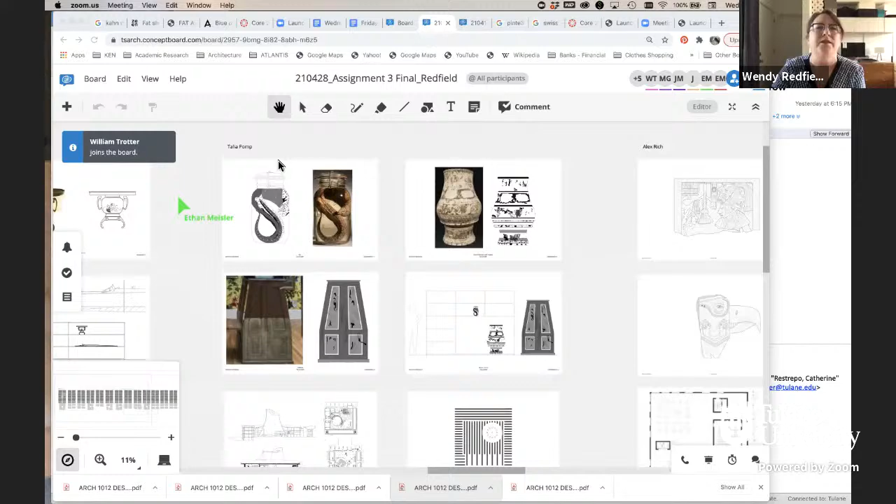All right. So without further ado, students, have I forgotten anything? Should we just get started? Okay. So we're going to start with Talia Pomp's project. And by the way, have you familiarized yourself with the concept board at all?

The drawings are in sort of 2 columns per student. And they start with what we called the 3.1 sub-project, which was the curation of 3 objects to draw in Rhino to start to get familiarized both with the collections and also specific artifacts. And then of course we were saving them as entourage at this phase to place in their final drawings. Then we went into a phase of precedent analysis and diagramming to get a sense of figure and field.

In our studio's case, students had to pick from a list of 2 sets of precedents. One were kind of visionary plans like No Stop City or Hejduk's Diamond Museum. There were a few others that you'll hear about. And then they had to pick from a list of built projects. So we had everything from SANAA's Zollverein School of Management to Palace of the Assembly to, oh, I'm blanking. We had Exeter Library, but I don't think that ever came through in any of the final projects.

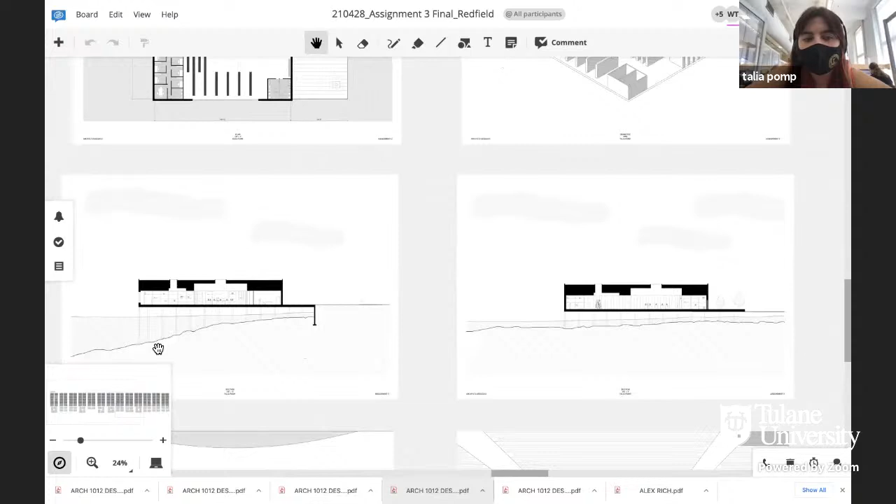And then I drew the perspective drawings of the 3 main galleries, to just show more of the space and how it's experienced by visitors. And then the last one is immersed in the shelves.

The top left perspective is of that large cylindrical one? Circular, yeah. Which was the assembly hall in Chandigarh. And then you have a smaller gallery in the top right, which is this long thin one in the plan, correct? That's the entry gallery, yeah. And then this is a typical view within the shelving, right? Mhm. And then is this your small orthogonal one? Yeah, this is the smallest one. Which is up in this corner, right?

Mhm. Okay. And I know the project was purposefully an internalized project. But can you talk just a little bit about entry? I see the two double doors in the front, what looks like a little desk and chair. But a little bit just about entry and sequence and how people might move through and what your thoughts are with that.

Yeah, so the entry kind of leads into that long gallery, and then you're invited in through these tall shelves, which then open up to more gallery spaces, kind of hidden within the shelves, and then just through and around. And also, since it's an archive space, I was imagining if you were looking for something specific, you would be led to where exactly it would be, or you can go through the galleries and through the shelves into the spaces. Yeah.

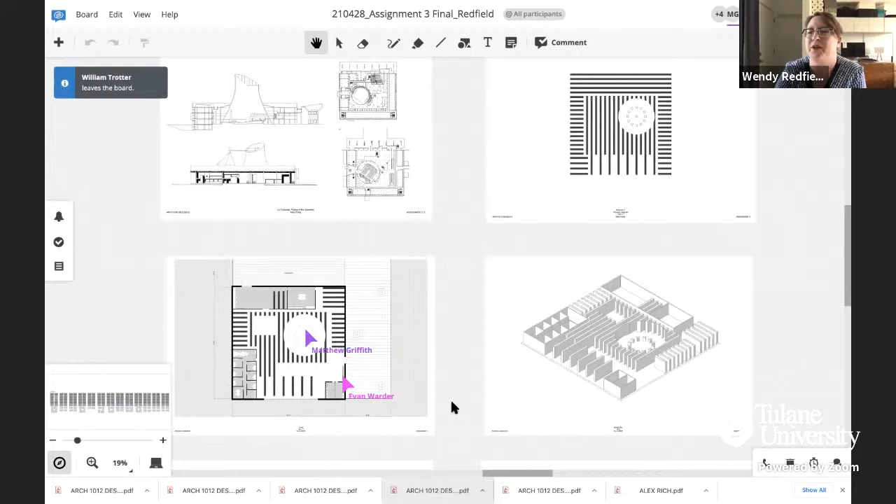What direction is north? Just curious. I'm not sure. I mean, it's more like Riverside. We talk about Riverside, uptown, downtown. But the Mississippi River is fully there. So the traffic of ships and boats runs that way. This is sort of the land side, and this is way down in the Bywater. It's past the Marigny, isn't it, Evan?

Yes, it's in the Bywater, and the north is technically slightly up to the left. Okay. So like that. Yeah, basically. I think that's right. Yep. Cool.

Well, I'll jump in. I think the precedent's a really great precedent project, and I think you understood some things about it. There's this regular frame or module to the building, and then things can happen in a free way inside. That really is common in a lot of Corbusier's mid-career work, where you have a grid of columns in most cases, and then important spaces or objects, whether they be the assembly hall or stairs or offices, get to be these pods of space that are shaped and located in a way that's indifferent to, but always thoughtfully related to the column grid.

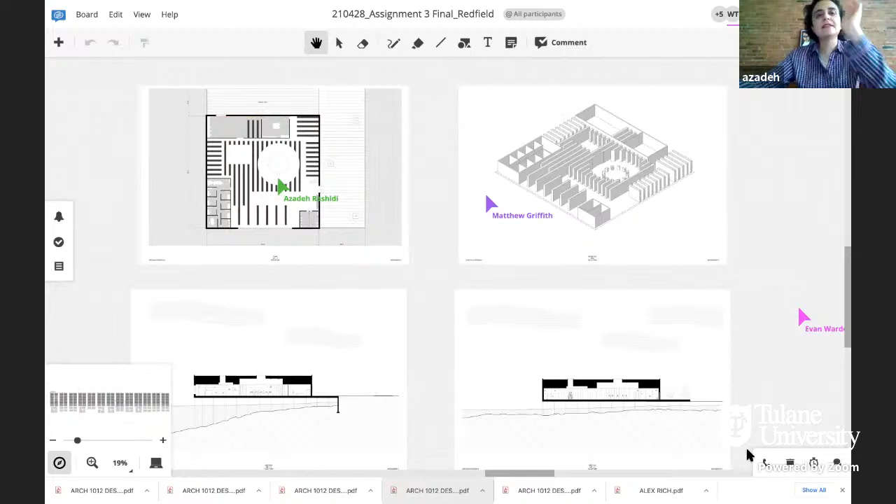Yeah, I agree that it's a really great precedent, and I like what you've built off of it. I think the intensity of the experience of moving through these tight clusters of shelving to discover gallery spaces is really wonderful. I think the organization of what is back of house could be a lot stronger if you really intensified one edge.

The bathrooms right here, I think, is a poor choice, because you could make more of your entrance and the generosity and the open views out by removing this piece and really thinking about the solid service space edge, whether it's this zone here or this zone here, and freeing up some more spaces for galleries as a result, or even just really thinking about the orientation of the shelving and what you discover when you get to the end of a row like this, for example. Does it have to be solid wall, or are you framing actual views out?

And then the other opportunity is to really start playing with this roof form. I think you've stopped at a very flat roof line, but the intensity of this experience and arriving at this space should yield something magnificent once you're there, in terms of the volume of space you inhabit, not just light pouring in, but really exploring how you sculpt that space three-dimensionally.

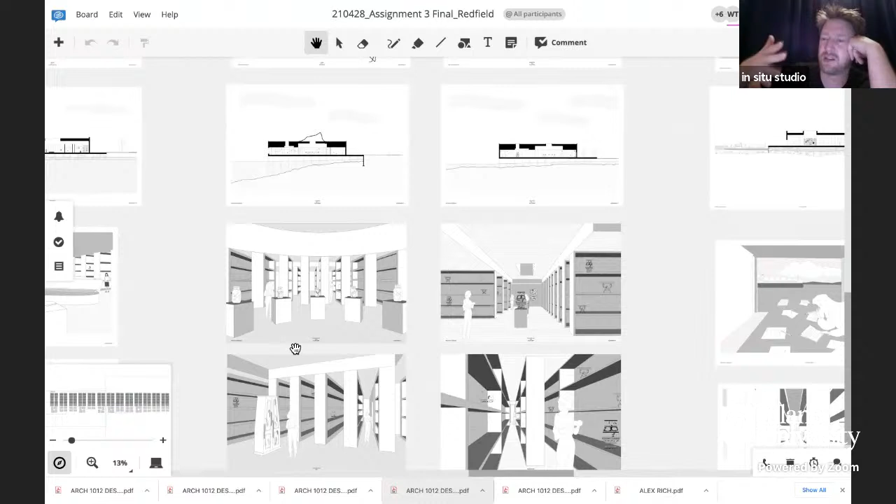I also think it makes total sense that you didn't do this now that I know it's been 3 weeks, but the one thing in your renderings that really stood out to me is that all of the shelving units are the same, and they look like shelves. In a space like this, you would eventually get so intimately familiar with the collection that you would be designing little vitrines and certain lighting conditions and relationships between skylights and little pedestals, to display some of the most significant things in a special way, and use that to guide people through the space. On the way, they would see the myriad other things in the collection displayed in a less important way.

And you could use that to start to create a path or a series of paths or a loop through the space that would draw people in. From the moment they walk in the door, there's a first destination inside that they're drawn to, and you pull them back into that main space that you want them to be in. That would take a lot of thought, more than 3 weeks would have afforded, for sure, but something to be thinking about.

Yeah, all of these comments just made me really excited for future projects, because all of those ideas are really awesome, and learning more about the precedents just made me excited for learning more. So thank you.

Some students did, and Talia was one, kind of broke the rules a little bit and added windows in various locations. She has this big one out facing the Mississippi. But in some ways, I think the use of skylights alone would be more in keeping with the precedent, which doesn't have a lot of exterior breaks. All light comes from above, and it's very dark actually in that courtyard space.

But it seems like the lighting above the galleries that she's included in the sections would also tend to draw you; you would be drawn to the light like moths maybe. Right. Yep. Which are the main gallery spaces.

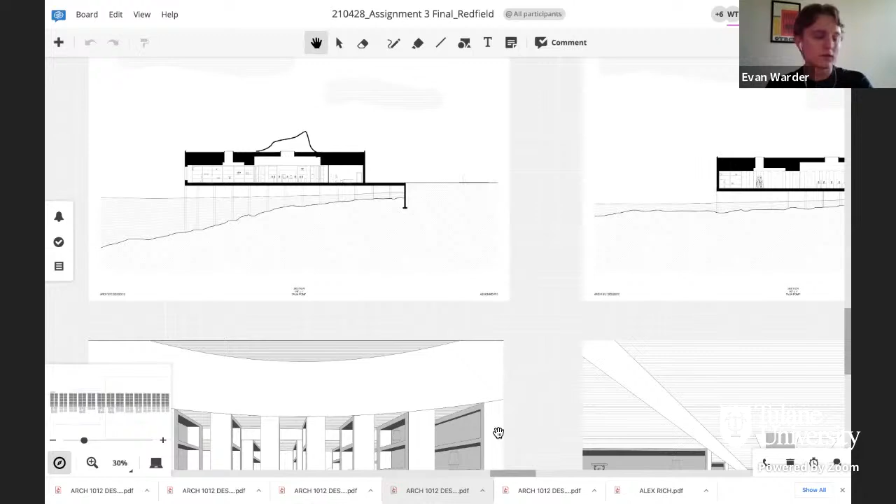Well, if there are no more comments here, we should probably move along. We'll go a little long on these early ones to get through these various issues, but we'll pick up as we go. Thank you, Talia. Great job. Thank you so much. Thank you. All right, Jordan.

Yeah, hi, I'm Jordan. When I first started, in 3.1, I was mainly attracted to a curation of Mardi Gras themed items or artifacts because I'm a native of Louisiana. But after that, the precedent I decided to go with is No Stop City. What I found interesting about it was this aspect of organized density throughout the shelving, interrupted by these organic curves throughout it.

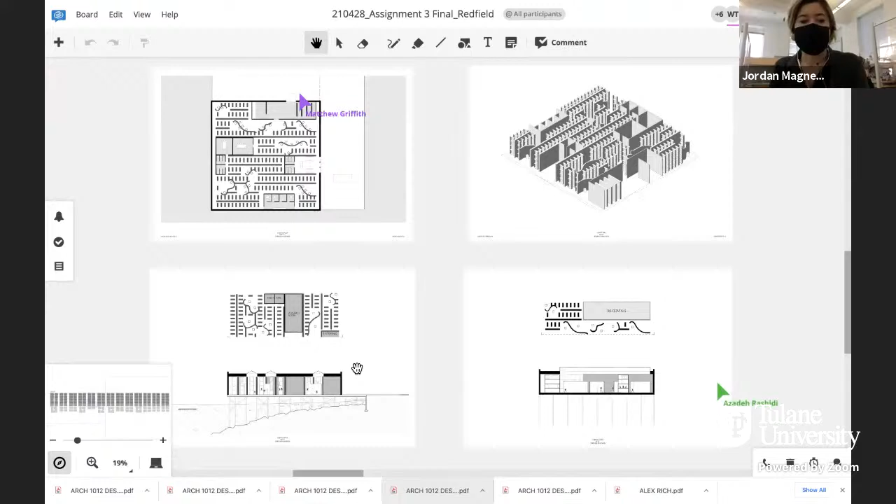And I feel like it really fit my idea of exploration through an archive, where you go on an adventure, wander through these shelves, and discover these little pieces of space scattered throughout, highlighted by different skylights above them. That was a lot of what my process was concerned about, especially different ceiling heights and ceiling levels, so you can still have a sense of connectedness through the archive but still work with this density of the shelves in between.

So the wiggle lines in your plan, what happens at those moments? Those are just walls, and they pretty much highlight the gallery spaces. They're what interrupts the shelving for open space. I'll come down and show some of the perspectives.

So Jordan went the route of many small gallery interruptions rather than one or two big gallery spaces, which I think is arguably in keeping with her precedent. Or certain depictions of her precedent. There are so many different images of No Stop City. The first thing is to choose which one to follow.

Yeah, and honestly, I particularly like the left perspective, because you see the little object at the end of the aisle, which is how I imagine people finding the gallery spaces. You see down this long aisle of shelves and there's this little pop of an object at the end that you want to walk toward.

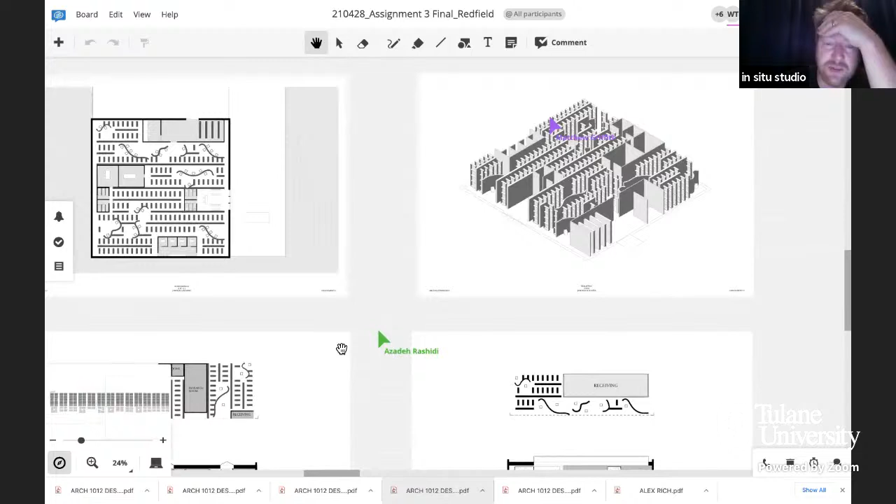In your axon with no roof, it looks like all of the curved intervention walls are the same height as all the other walls. But in your section, it looks like they might be shorter. Is one of those true? Yeah, they actually are shorter, because my shelving is like 18 feet 6 inches and the curved walls are 12. Okay. It may just be a trick of the axon. Actually, they are. I can see a couple that look like they're shorter.

I think what throws me in terms of where you went from the precedent study to this plan development is the addition of these long linear walls. Because that plan really implies the freedom to move in all directions, right? There's a grid that's a structural imposition, but there aren't really impediments in your way as far as the precedent goes. But these long linear walls, I think it's an added system that actually really kind of disrupts the flow through the space and the experience of the space.

And I think you could do entirely without it because you have the structure of the shelving and you have the freeform gallery moments through that. But the whole kind of exploration of space is constantly blocked by these long linear walls. So I'm curious to know where they came from and why you felt it was important to have them.

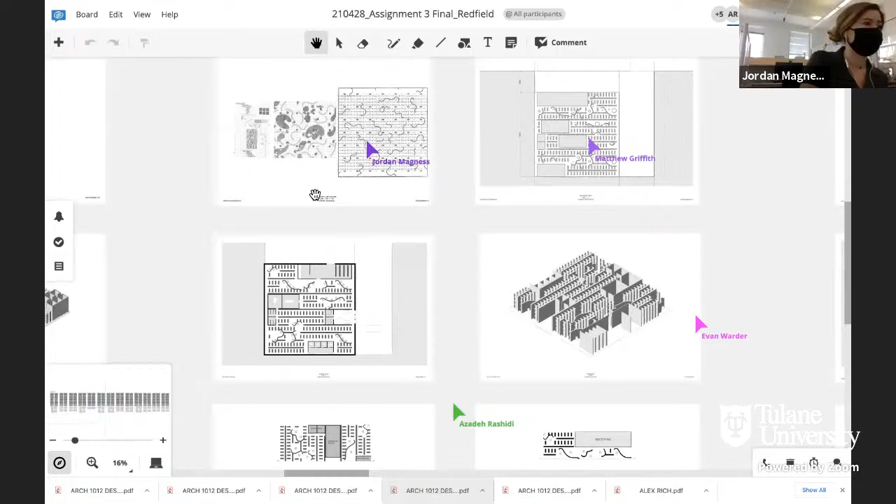Mainly just I thought that they mimicked the piece of the precedent because, I guess in the precedent image above, it has the little pieces in between, but then it has these really long lines of, yeah, of like dotting. And I did try to use the kind of curved walls to break through it so you could still move through it, but they definitely still...

Yeah, I think you could be more aggressive about allowing people to make their way through the plan where these curved interruptions happen by having the curves break through the walls more. But I can imagine this project where the back of house spaces are actually the structure. So it's like a poche that's holding up the roof. And then you don't need these linear walls at all. And it's all about shelves and the moments that are broken up by galleries.

I think as a clarification, the horizontal elements are walls in the space in terms of space definers, but they're also long shelves. And there was a moment where the 9,000 or however many square feet and lineal feet of shelves, it was massive. They were told to maintain about a 70% solid shelf versus open space ratio.

And so there was a moment, especially as the program and the idea of a real plan came along, that all the shelves kind of disappeared. And so I was, again, a little bit of the Nazi of like, we need more shelving. But I completely agree that these horizontal ones probably could have been broken more at different points.

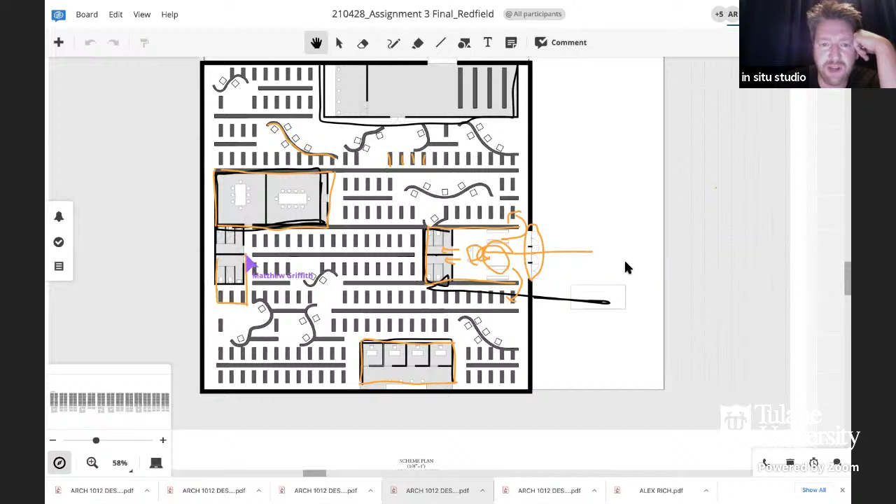And once you get around there, like Oz was saying, and just to build on that, I would make every effort to get all of the supporting program in these really distinct zones. No L-shaped things, just all rectangles floating in there, and then everything else is either a shelf or a curved wall. I think the reason I was asking about the height of the curved walls is going back to this discussion about how light's brought in. When I look at your section, which I'll go to wherever it was, yeah.

This sort of move here, bringing light in that is aligned with or in allegiance with the kind of bays between these straight walls that I think we're all saying might go away. That feels like that's one way to bring light into the space, but I wonder if it wouldn't be more engaging to actually have the curved walls somehow come through the roof plane and catch light and bring light down,

and then actually have the shelves be shorter than the curved walls, so that when you're looking across a whole space, you can see these curved walls going up through, and you can kind of use those as a wayfinder in the space across the kind of sea of shelves to find different nodes or important spaces. And if they were slightly different colors or a different material, they could start to become objects themselves in the space that you're then drawn to.

And then these more important objects that you've set against these curved walls would take on more significance. It might be a smarter way to use those walls, because in the plan, hierarchically, they feel much more important than the grid of shelves. And to have them be shorter and to have light come in over the shelves instead of in relation to those spaces that the curved walls make seems a little backwards to me.

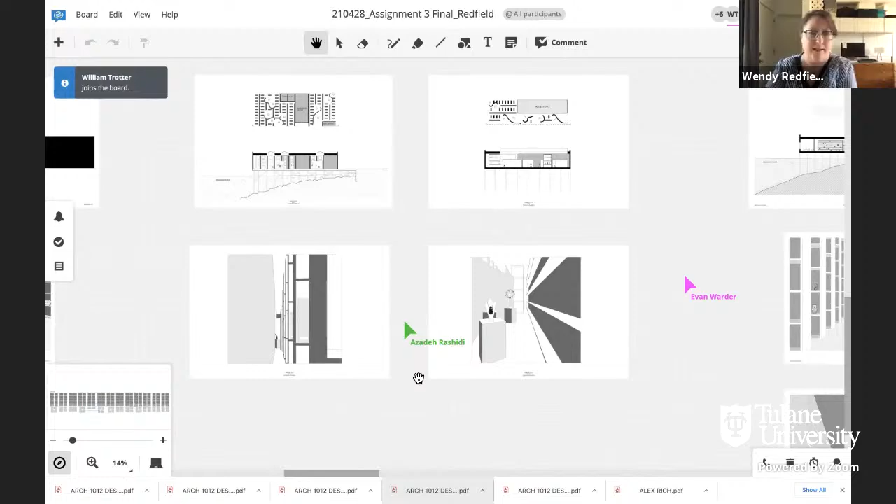By the way, since we're really focused on precedents and they're really building their visual literacy, et cetera, if you have specific precedents, I can go hunting for them and plop them on the concept board. Just as I'm thinking of, I can't remember which Swiss architect, but there's a ski lodge that has a series of these kind of popping up skylights. If you can think of particular examples anywhere along the way, I think that helps the students too.

Well, I think this conversation about the precedents is so interesting, and what hopefully the students will take away from it is, I notice your plan is very, very similar. I can tell how you derived your plan from the precedent almost directly when I look at it. There are certain walls, like this wall is almost in the exact same place in the precedent as it is in your project. Same with this one. Others had to move to accommodate back of house program or whatever.

It makes me wonder if you internalized the lessons and the ideas in the project, or in contrast to that, if you were more interested just in the patterns and the kind of shape of what was there. But with precedent, instead of getting bogged down in the specifics and trying to do exactly what the precedent does in a literal way, I think it's always nice to learn the lessons.

And in this case, there is a really homogeneous field condition with these special moments that kind of interrupt it and cause a disruption in that system. And those things immediately become the most important thing. And so the experience you have in the architecture should probably be elevated in those locations as well. One way to do that would be to bring light in those locations, as we were talking about; there would be other ways to do it as well. But just remember that lesson: when you're looking at a precedent, always ask yourself, well, what's the big idea here?

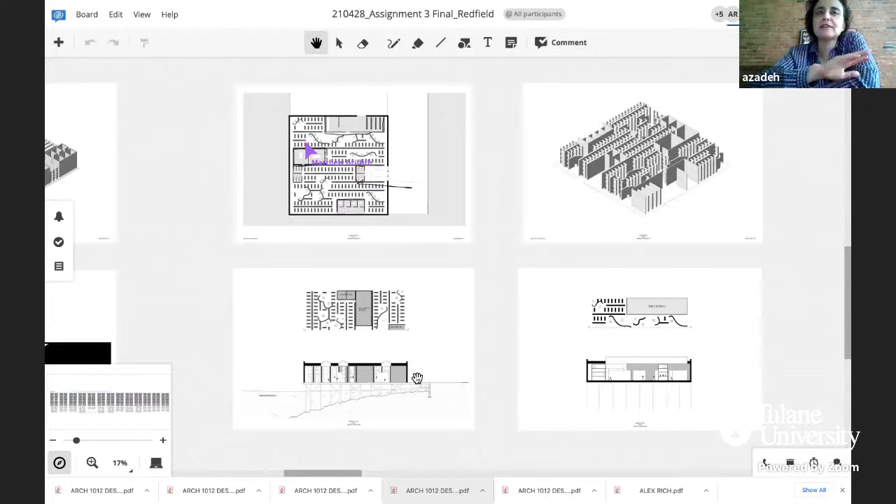So I think it was a surprise, because like I said, last year it was sort of proposed as like this building could be anywhere. There were no windows really even allowed. And even when the students were presented with the site here, it was sort of proposed as well. This thing could be taken off on a barge and moved somewhere else, so like, yeah. So they were given a site, but sort of discouraged from responding to it. We'll just pretend there's no site. It's fine. Better to do it that way.

Although at least they have learned kind of the rudiments of how to draw an entry plaza and sections. I think that's really great support. So it's gotten a lot less abstract than the final drawings last year, which were just black at the bottom, black at the top, and black on the sides and everything that was going on the inside. But at the same time, that raised a lot of complications and opportunities that really were almost impossible to fully deliver on.

So I'm not surprised by the kind of things coming up. And I think it's great to talk about them as sort of projections into what's coming next and the various facets of architecture that we couldn't really get into here, but they will. Yeah. So I don't want to discourage the sophistication of the conversation, but just to contextualize it a little bit. Okay. Right. Did you have something else to say, Matt? Oh, no, I think I'm good.

I just noticed there's an alligator in the section, which seems appropriate to Louisiana. You'll find pelicans and kind of like manatees that have swum north, I guess, from Florida. Yeah. Yep. Creatures going on in various places.

All right. Thank you so much, Jordan. Yeah, thank you, Jordan. Thank you. All right. Next up is Alex. Hello, how y'all doing? Hi, Alex. How are you? I'm good. How are you? Good. Alrighty.

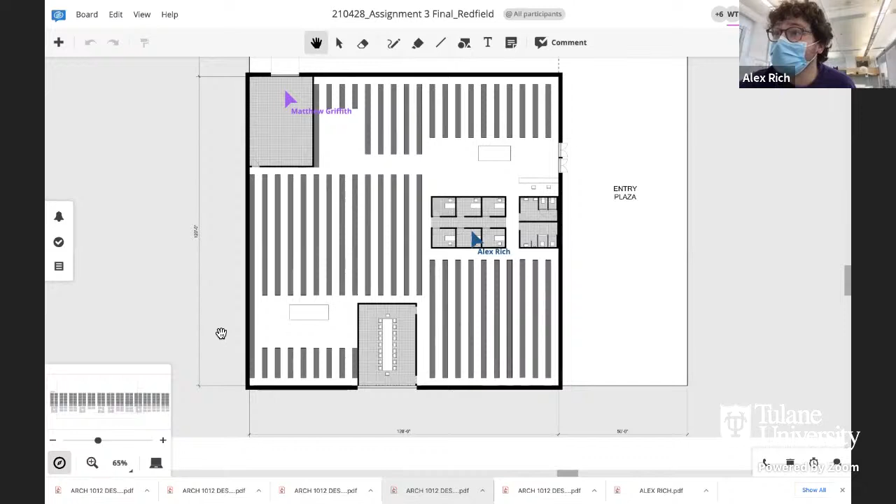And so you see in my plan, all the shelving, you enter in through a large exhibit, and you then walk through a hallway to another smaller exhibit. From there, you would walk through shelving down into a smaller exhibit as well. From there, you could walk around the edges or through. This is the research room right here. It's broken away from the rest of the museum, offices and bathrooms and loading spaces at the top.

And with my perspectives, the first one looks through the research room. The second one looks right at the entrance, the biggest gallery. The third one on the left looks through a hallway, squeezing through shelving. And the fourth one looks at the second biggest exhibit.

And I'm kind of a history buff, so I was really inspired by MARI, which is the Middle American Research Institute. So there is a theme throughout my whole entire exhibit, specifically ancient Latin American artifacts. So, yeah.

Can you tell us just a little more about the precedent? Because I'm less familiar with it. What was it called again? SANAA's Zollverein School of Management and Design. Okay.

I think your approach is very clear, and the organization of space is good. I think one thing your precedent has, which you would benefit from, is just kind of the celebratory sort of corner space. I wonder if, I know you have shelving quotas to meet, but it seems that experientially at some point you want to reach a space that really kind of opens up to the outside.

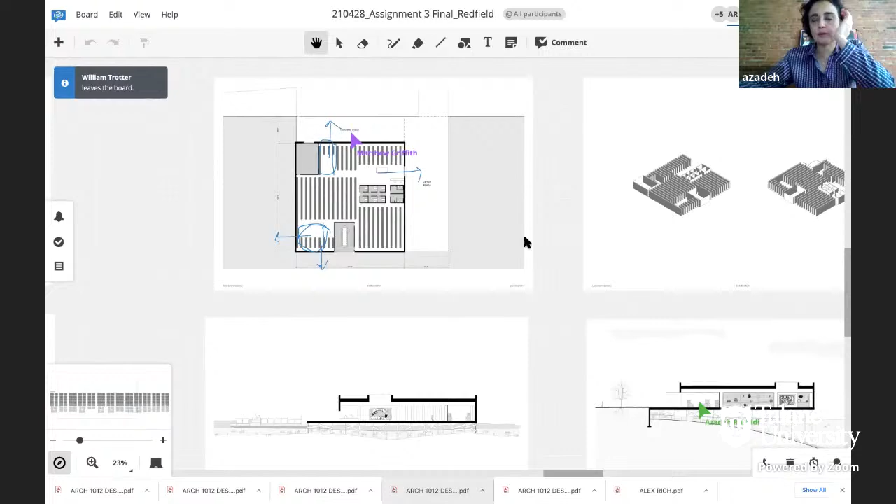That then becomes something that can help further the section as well, which you're well on the way to doing in terms of the skylights and moments of punctuation. But as these moments engage the corners of the building, I think it starts to inform what can happen with a facade potentially. I know I'm not supposed to talk about that, but it's to like stifle the conversation.

Take ownership. Every time you say the word facade, we're going to hit a buzzer. We can't help it. We're architects. No. I mean, it's all fair as long as you know what they had to work with, and that's all.

Yeah. I think that's a really interesting comment, Alex, because you've kind of given that priority of great space and view to the meeting room. So it's understandable that that was almost the first perspective you did. And yet that's sort of restricted to just certain individuals who use the space. But the idea that that large picture window out over the Mississippi for the researchers could have actually continued to encompass and characterize at least one edge of that gallery, if not the full corner. That's a really interesting idea.

So Alex was one of the first to break the window rule, in other words, he really wanted. Good for you. Given that he had it in hand and knew what to do and put it in the right place, I was like all for it. And so I think that, yeah, again, with another week and a half, even, that kind of idea would have been a great addition.

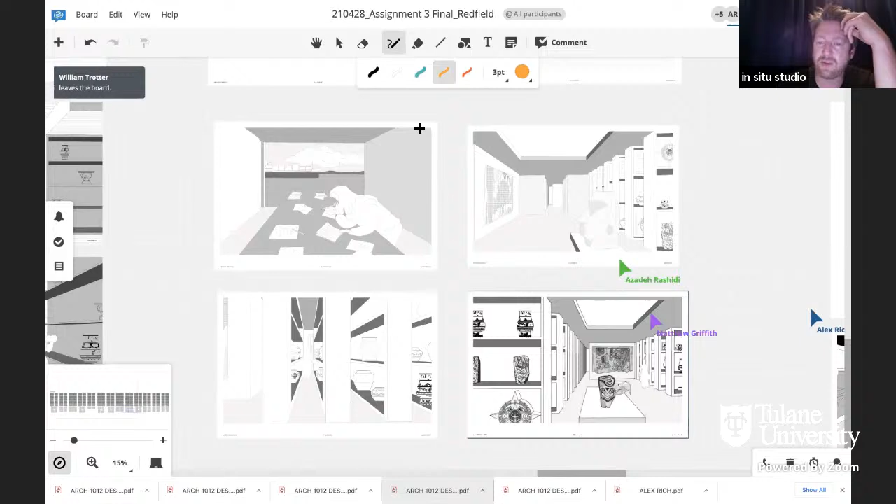And you've associated natural light with those spaces that are given to those more important objects, which I think all those instincts are right on. That lower right perspective, by the way, is a great example of how not to make roof openings, where you can just read the unnatural thinness of the roof plane. There's no curb around it or no contour to a light well or something like that.

And I know you didn't have a lot of time, but I hope all you guys will continue to investigate different ways of controlling and directing light into a space, sometimes indirectly. I think that space would be really beautiful with a more hushed type of light that's from a more mysterious source, and where you really can't see the sky.

I lied. I am actually familiar with the precedent. I just didn't recognize it from what, on my screen at least, is a blurry plan right now. It's a really cool project.

The one thing that's so different about it than what you've done, and I don't know that it's your fault, I think it's more in the nature of the program you're working with, is the majority of the space is open on that main level plan in that precedent, and there are discrete objects that house certain programs, three kind of back of house support pieces, and then the auditorium. And because there's so much open space, those really feel like objects in the space.

And anything else in the space, like display or shelving or seating or whatever, is much lower than the ceiling height. And because of the nature of how many shelves you're required to have, your space is in many ways the opposite, where in a figure ground it would primarily be dark space, not open space. And you're carving out these little open spaces. So I hope you're aware of that significant difference.

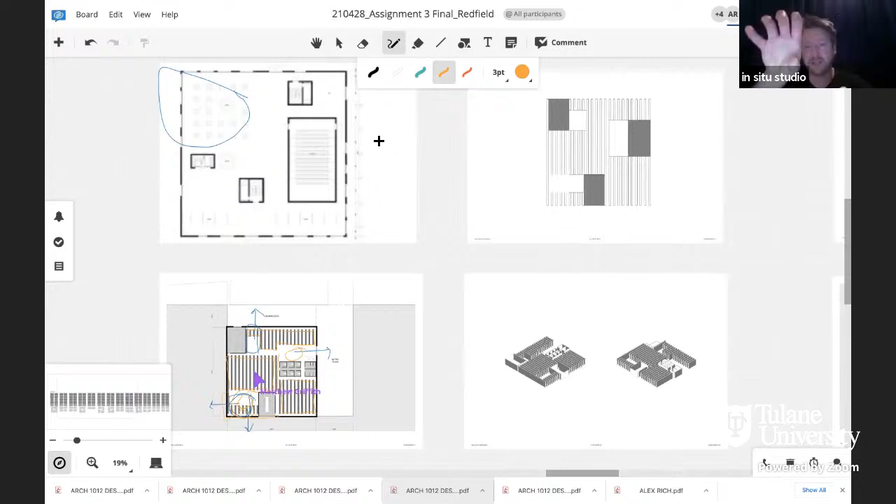When you start thinking about these things as blocks, they can start to kind of pinwheel or slip and create these moments where you can kind of slide in between two when they overlap each other, and then find your way out diagonally. And so there's moments like this, where two pure rectangles just kind of slip from each other, is how you can start to connect one negative space to another. But I think in general you got a lot of it right.

And again, those perspectives, of the ones we've seen today, they're pretty convincing that you're really thinking about this well. And I think one way you're starting to get at the precedent more in terms of this open plan is by defining a larger volume than what the shelves define spatially, right? And I think you could push that a lot further by really lifting that roof up so that the first thing that's perceived is the overall shell of the building. You feel that entire space. And then these shelves are really kind of secondary divisions within space.

So I think your instincts are kind of there because you're holding the shelves down a certain dimension. But is anything restricting the volume of building you're making? Nothing, right? So imagine if your roof was suddenly 20 feet higher than what you've drawn. Then you really have that kind of overall form, and you're exploring within it, and these shelves become a secondary kind of structure of space.

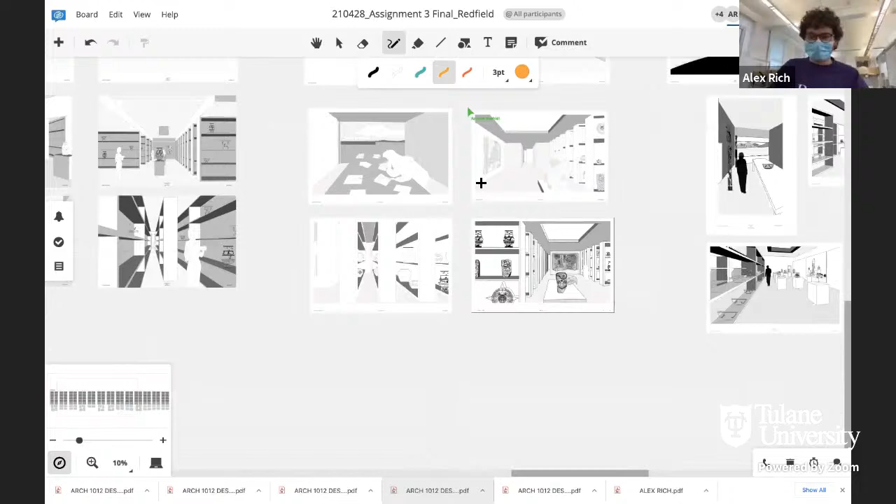Have a good one. Yeah, you too. Chester is next. Are you with us, Chester? Hello. Hey, how are you? Doing well. So here.

My precedent was the Kunsthaus Bregenz by Peter Zumthor, and it's a museum itself, so that lent itself to a really good exploration of the building and was really helpful. Some of the ideas that I wanted to explore were the ceiling and how it's basically these muted panels of light, and they cover the entire ceiling throughout the structure, and then how the walls were these very simple and refined solid forms that sat towards the side of the building.

So moving to my diagram, I wanted to incorporate the walls in a way that was very direct, because one of the things I appreciated was how efficient the building itself was. It really was minimalist in nature, and so that's something I've carried into the diagram. And I came up with this rule set to orient the shelves, so I had them repeat into the center gallery space.

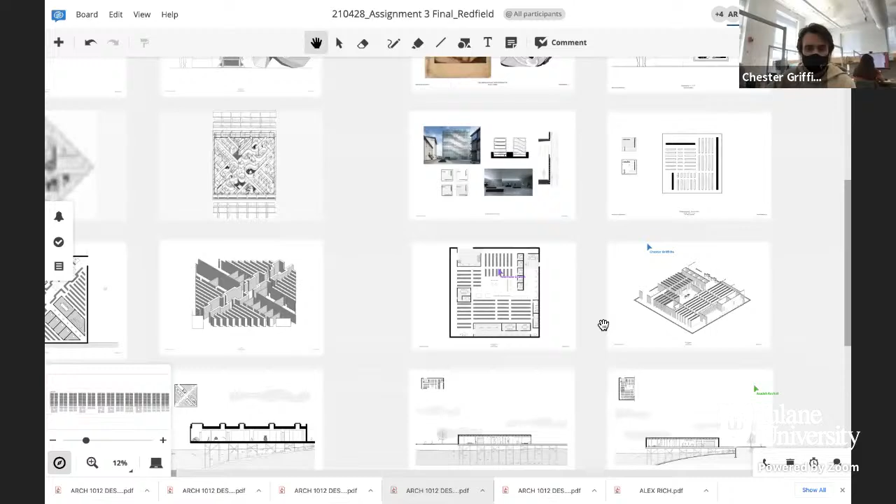And the entry is also an idea that you're led towards the gallery space, getting an introduction into what you're going to see in the middle of the space, just as a preview. Additionally, I wanted to make sure that the sections and perspectives gave an insight into how you would experience the space walking through it as you would a gallery. That's why I chose to incorporate the hanging gallery walls with the ceiling, so you get an idea of how it would look as a real space.

Is the ceiling everywhere, and is it artificially lit, or are there openings, holes in the roof somewhere? Yeah, so they're offset from each other about 2 inches. And then there's a lighting fixture within that, and it's like a muted panel, very similar to what happens in the Kunsthaus Bregenz. So it's offset, but it does have artificial lighting there.

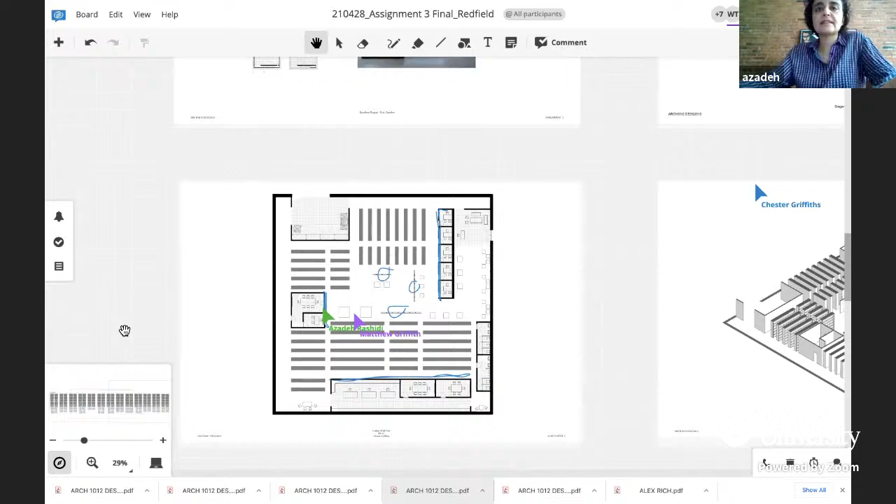So in terms of the organization of the plan, it's worth considering whether these doors should really happen on this. This is a gallery, I suppose. But think about the side you really want to privilege and use, because these are going to be different than your shelves, and they're important surfaces to explore further.

I really like moments like this, where you slip through a tight corridor and discover an amazing space. And when you draw a plan, you should be very wary of corners like this, because that's a bad dead end condition where nothing happens. So think about entering a space like this and really using every bit of floor plate you have to your best advantage. I thought we'd caught all those dead end corridors. They have a way of sneaking back in here and there.

Yeah, that's a great suggestion, Oz, for sure. If we have any more final comments.

I think the blue surfaces that Oz just traced are the key thing, and they aren't necessarily located exactly there. I would argue that the program behind or within those walls needs to be as attenuated as it possibly can be, so that those chunks of program can be those walls. And I couldn't agree more that the screens feel completely superfluous. You really want to create an open space between this pinwheeling of program walls. The challenge then becomes how to get all the shelving in there without it becoming a distraction. But that's the challenge of the project.

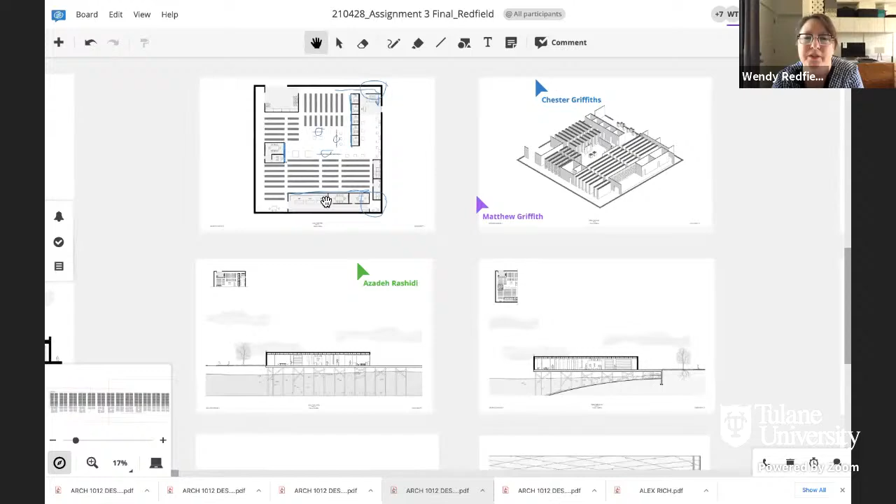These are really great precedents to work off of. Yeah, they're the gifts to keep giving, I think. I've tried to winnow it down to the ones that work well. And I think, to your credit, Chester, you really did study this building. I do feel like you understood it not just from the standpoint of one of the plans, but of the whole material palette of the building, and you really tried mightily to introduce some of the atmospheric qualities of the spaces and not just the plan diagram. So I would say good job with that.

And don't leave the Kunsthaus behind. It will serve you well on many future occasions. Oh, go ahead. I was just going to say that some of those blue areas that were just talked about, looking at that differently now, I think it opens up even more aspects of the precedent. After a second time around, you look at that and you go, okay, well, there's a whole different slew of possibilities you can go from just those suggestions. So that kind of makes me want to revisit this and see what other path the precedent can take. That's what final reviews are all about.

Yeah, I hope you noticed that around the edge of the building, the light coming through the ceiling is natural light. I think you probably know that. So if you have these moments of natural light coming in, maybe you don't remove the ceiling. Maybe the ceiling keeps moving under a light monitor, so there's just a portion of the ceiling that glows much more brightly than other areas. And that could be a really beautiful thing, especially if you could read that whole ceilingscape when you walk in. It'd be really amazing.

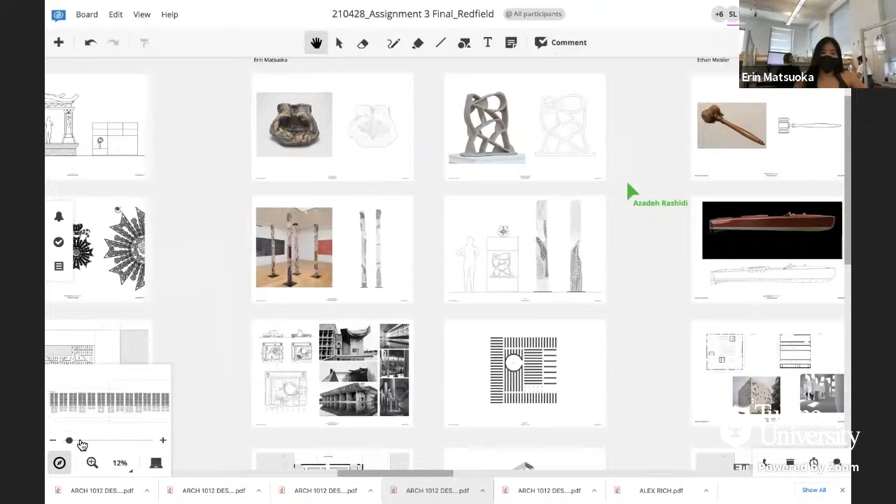Anyway, okay, great work. Thank you, Chester. We're going to move to Erin's project next, which is just down the road. Hi, I'm Erin. Starting off with the artifacts, I chose sculptures that are all some sort of abstraction. And then my precedent is the Palace of the Assembly by Le Corbusier. From that, the main elements I was focusing on were the main margin that runs along the three sides, the spacing of the walls that support the large curve on the outside, and then the offset circle space in the middle.

In translating that into my plan, I used that margin to pretty much dictate where my back of house space is. I also reoriented it so that the curve would be where the entry plaza is, and I lowered those shelves down to let in more light along the entryway. Then with the dense column grid, I wanted to mimic the columnar grid feeling in the actual precedent, where they're almost touching the ceiling and you get disoriented when you're in the middle of those shelves. Then carving out the main sections, the entry exhibit spaces, and down the hallway into the offset circle, which I use as my main gallery, and then back out into the shelves. So yeah.

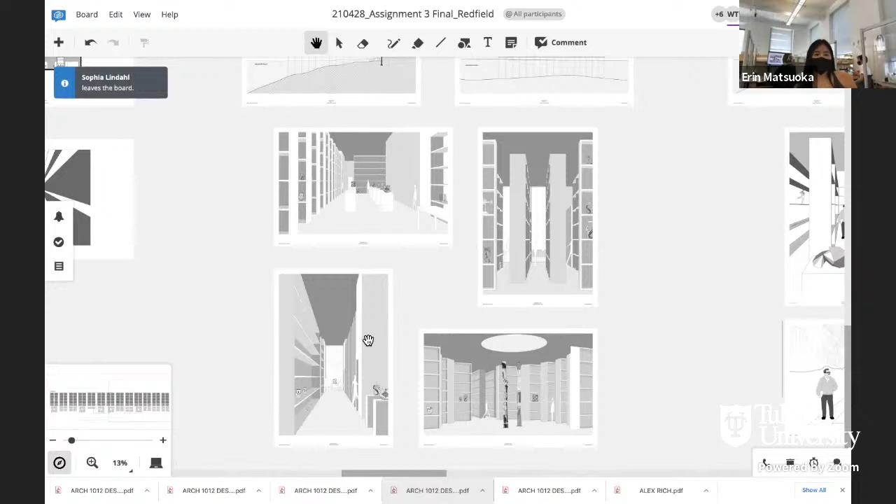How do the abstract artwork and sculptural forms inform your project? Well, I guess with the form of the precedent plan, I used that abstracted diagram as the direct layout and circulation. And then going back to the artifacts, exaggerating the painted trees as a main gallery exhibit piece, and I exaggerate those so that they're similar to the columns. And then having smaller pieces throughout the spaces, mostly in the entryway, where you see those pedestals that lead you back.

Well, I like the organization of your project a lot. I like the clarity of, you know, this band of back of house and leaving the larger space for exhibition and shelving. And I like the play between the spacing of the shelving and the height of shelving as a way to kind of influence the experience and think about things like natural light and so forth.

I do find the central gesture to be too dainty. I assume again these things are kind of being driven by the requirement for amount of shelving, but this gesture I think could be a much larger thing that encompasses much more underneath it, right? Like you can arrive at a space that connects to that skylight, but your overall roof form and volume of space that you're creating can be much bigger in relation to this plan.

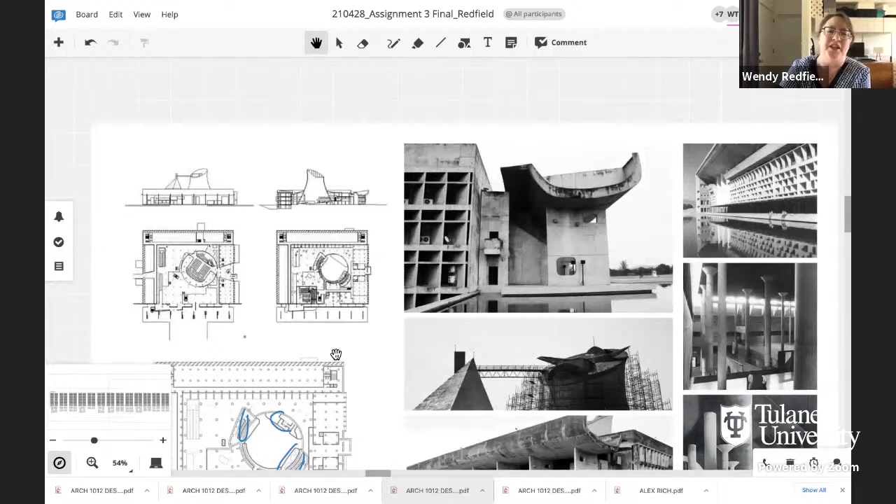Every reviewer in every review always says something that I'm just kicking myself. Why didn't I think of that? And that's bingo. That's one for sure. I mean, what a brilliant idea, because you know, it would be a reversal of what Corb did, right? So the space at the bottom is huge. You know, it really dominates that courtyard space. But then, you know, it kind of narrows to the top.

So if you understood it the way that I did, Aaron, what Oz was saying was that the small gallery in plan at the bottom, which is necessitated by needing so many shelves, you can't have a huge cylindrical space. But the idea that the kind of dome or circular skylight above it could be much bigger and even offset from, you know, not just centrally located. Brilliant. I love it.

We talked a lot about the necessity with this project of the cylinder being off center. I feel like that was a really intentional, even ideological statement by Corb that, you know, this is no longer an absolutist government. So he pushes that central space off center. So we talked a lot about that in plan, but the idea that you highlight that notion of it being off center by having the dome maybe centered is even more powerful.

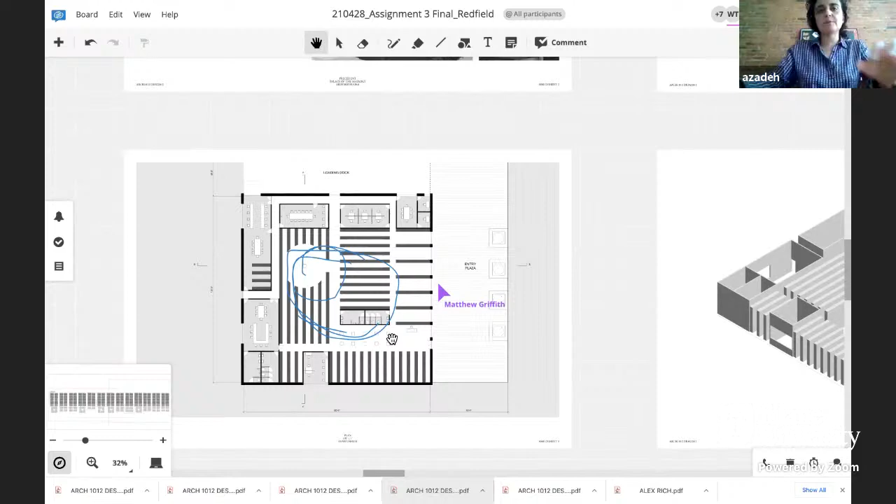It's really cool. And then it's interesting to look at the way Corb still has service spaces be part of that overall form. So when you look at your bathrooms, for example, it can start to hint at the overall form above by not being something rectilinear, but something that sort of defines the edge of this gesture, right? That's really neat.

I'm drawn to the different spacing of the shelves in the front area here. And I noticed that you violated the no windows rule. And it kind of makes me wish that the front wall of your project was here, and that somehow you were entering under a roof in between these fins before you ever entered. And the idea that you use this spacing to create a more open condition at the entry than you have in the more congested parts of the interior, I think is really nice.

I think another thing you've done really well is in at least one really clear case, when you're moving through kind of a route of circulation, you're able to see out. It's one of your nicer perspectives. I would encourage you to think about the same thing here, or maybe there's a hall in between these two program pieces, and this window is able to kind of be at the end of the hall. This idea that you're in these tight spaces, and sometimes you find these beautiful round gallery spaces, but when you cross over one of these routes that's meant for movement across the whole plan, you can kind of see outside.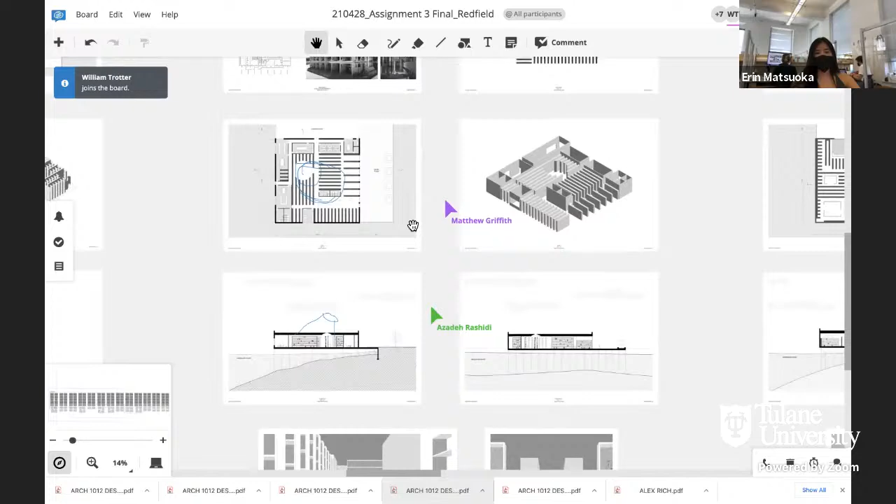I talked to Wendy about this, and we kind of just ran out of time, but building out onto that entry plaza and blending the entry with the outside a bit more is also something that I would have liked to expand on. So I appreciate these comments. They're very helpful, very in line with what I was hoping to go with. Nice work. Very nice work, thank you, Erin.

Okay, unless anybody's desperate, we'll do two more projects before the break, or one more. How are y'all feeling? Fine. Great. I have to make sure I have enough power. Hold on. Yeah, I should last. I have to go get a charger at the break. Okay. Well, let's do at least one more, and then we'll check in with you, Matt. I think I'm good. I'm at 41%. I'll keep you updated. Okay.

The next project is Jessica's. Hi. How are you? I'm good. Okay, I guess I'll start. My precedent was OMA's Parc de la Villette. We spent a lot of time doing our plan diagrams and eventually incorporating our different rooms.

I designed my entry space to be an open area with seating that almost forces you to visit the gallery space, displaying my artifacts. One of the things that I really emphasized in my plan was the opportunity for mobility. I wanted there to be paths stretching from the front to back of house spaces in every direction, with an accompanying door on as many sides as I could. I really just wanted it to make my plan more accessible.

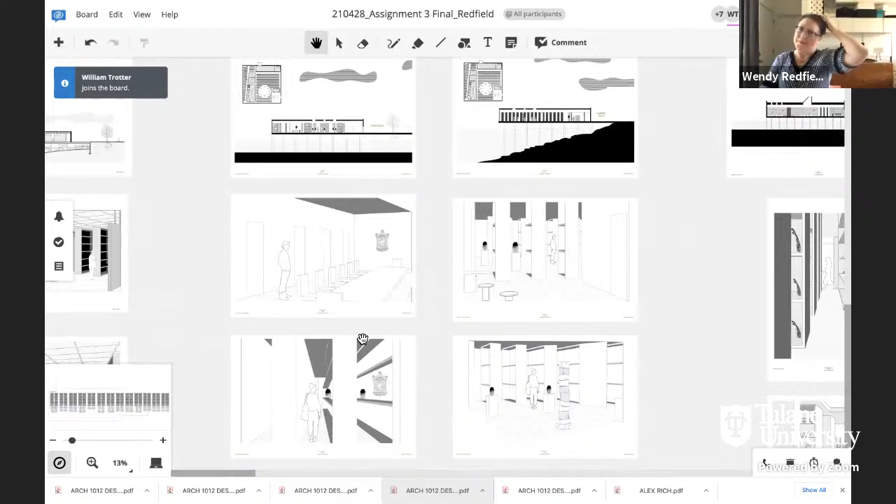That Parc de la Villette plan is just insane. Yeah. So much fun. Do you find yourself wishing he'd won the competition? I do. Oh, definitely. Did they come in second place or something like that? I don't know, but I think a lot of people feel that the best scheme didn't necessarily win. I hear people talking about the OMA scheme as much as the Tschumi one. Yep. The catalog of second place winners over the years is some pretty strong work. Yeah, the B-side, right?

Jessica, I guess in my mind, what are some of the key things you took from the precedent that you tried to do in terms of how you organized the plan? Okay. Well, definitely the elevator speech. Yes. Well, I definitely took that main path that was actually like a road, and I made that a walkway. And another thing that I took from the precedent was the big rectangular space,

and that's kind of central to the precedent. And instead of keeping that rectangular space, I kind of flipped it and made it shelving and put all of the back of house around it, right around where the rectangular space would be. So the space between the gallery and the back of house. And I also created my gallery kind of based on some of the visual features of the precedent.

There were a lot of circular elements below the rectangular area, and that's kind of how I got my inspiration for that. And I replicated that in the entry as well, that circular. You have to zoom in a lot if you want to see it. You can actually see it in the final layer too, but there are these two circular elements below the rectangular space.

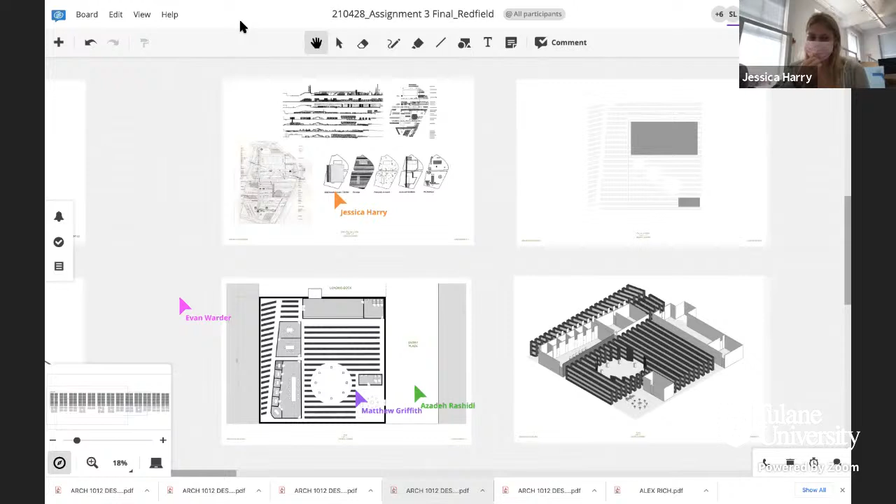It's funny that you say that, but also say that your project was about accessibility. Yeah. You're trying to do two contradictory things, which could be interesting, but the plan doesn't really distinguish between what makes this a different experience and path versus this, right? Everything's the same scale in terms of what circulation is. Mm-hmm. And I think you could push and pull on this a little more so that there's greater definition of what path is through the project and what that intention is.

Yeah, I think the thing that has been so important about OMA's work over the last 50 years is the way that different layers of thinking are transposed over each other, and your precedent's definitely an example of that. Typically there's an idea about structure or construction that is one vein of thinking. There's typically a really clear idea about program and the arrangement of program, and sometimes surprising or unusual adjacencies of program.

And then, as Oz already mentioned, there's the layer of circulation and how you move through the project. And a lot of their work, especially their early work, is really clear in being able to recognize distinctly those three things. And so I think a lot of what we've been talking about so far would build upon that. And to me, your project is very close to being organized programmatically in a very simple way. If you think of this as an object here, this is an object, and this is kind of programmatic thinking.

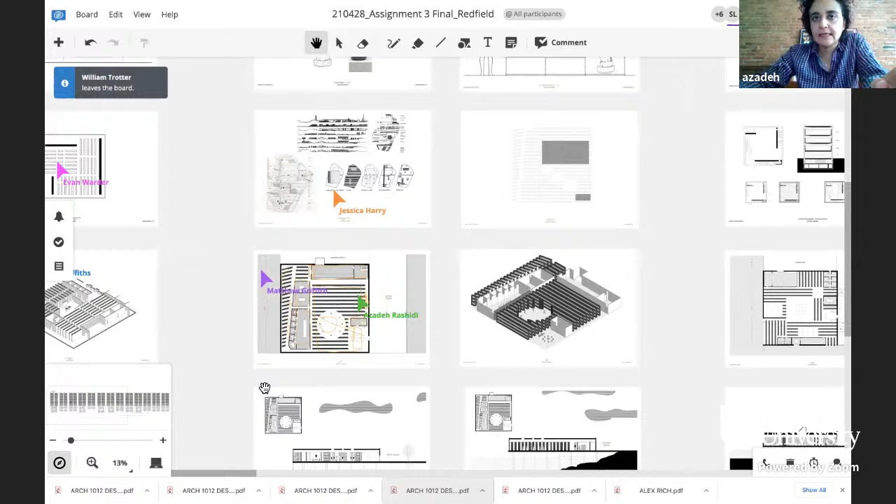So I wonder if you could introduce breaks in these shelves so that people can wind their way around. It's much like their follies, but it's moments where if you're walking along here, you can suddenly take a shortcut and do this and do this and make your way to here. So breaking up the rigidity of this suddenly creates all those other paths and works to your idea of accessibility, right? Because right now, if I'm stuck in any of these rows, I have no way out and I will feel imprisoned. But suddenly, if you start to break these shelves up at random almost, it becomes a much more interesting experience.

I think those are great comments. Do you have any questions, Jessica? Not particularly. I mean, what you guys said made a lot of sense, especially the part about breaking up the rigidity of the plan. If I did have more time to do this, I would probably cut through, create a path through the middle, make it more accessible.

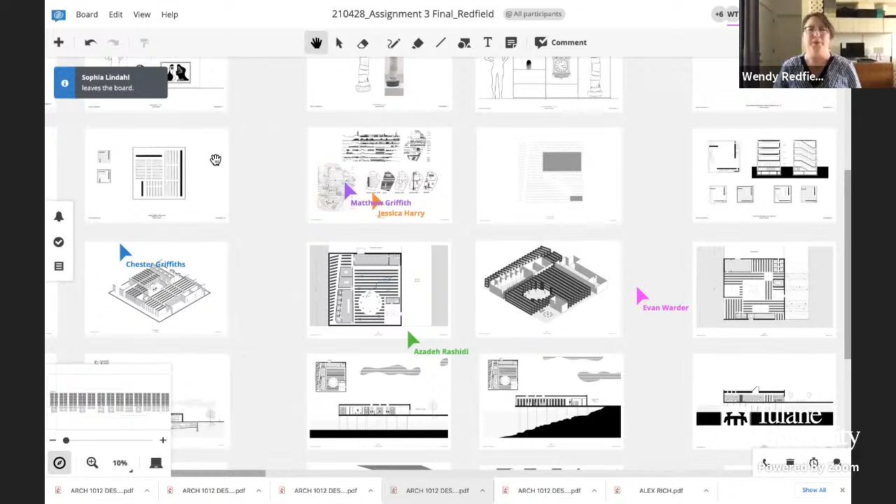Yeah, it's a tough one. Obviously your precedent is operating at such a different scale. It's a little bit like the No-Stop City. You're trying to organize a building with the same spatial strategies of circulation organization that are happening at a much larger scale. And then on top of it, you've got all this very solid program to juggle. So it is a challenge.

I really like the suggestions though about, now that you've established this very rigid and clear diagram, how to make these alternative meandering paths by cutting very selectively, not huge swaths, but selective openings in the shelves. I think that is great.

I also really like Matt's idea of almost having this back of house space over here, wherever that would occur, impacting the division of these two chunks of back of house space, so that you might have, I'm drawing in white, that's not the best. So that the division between the two back of house spaces would have started to pick up and reflect on that. Is that what you were talking about, Matt?

Yeah. Well, and that same diagonal, ooh, you're drawing in Zoom now. That's fun. Yeah. That diagonal also would clip just the edge of this important space. So you're not brought through the middle of it, you're brought right along the edge of it.

And just with that simple move, you create this one kind of circulation route that has all these surprising engagements of the special things in the project with one simple move. It might even, not accidentally, clip the corner of this thing, so it really kind of touches everything as it goes through. And the only way into these program spaces would be from these walls, and otherwise they would look completely mute around the perimeter of the rest of it.

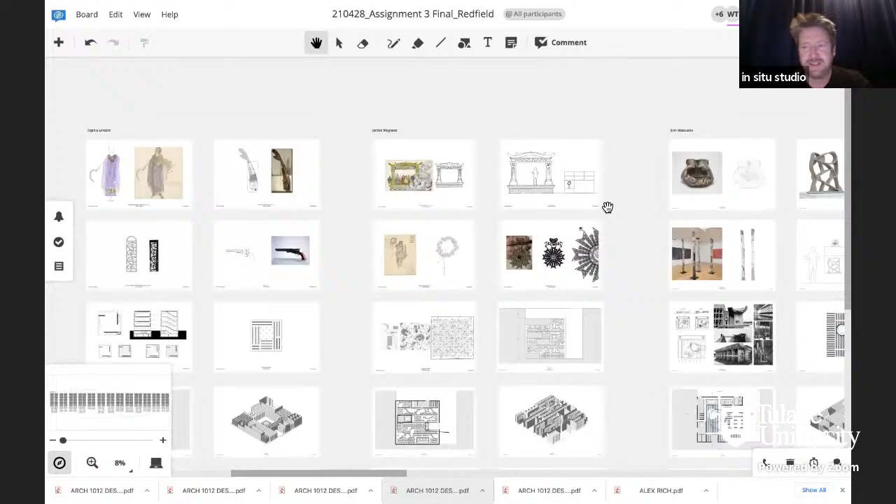Does that make sense to you, Jessica? Yes, thank you so much. Very good. All right, how you doing there, Matt? Oh man, I think I'm doing great. All right, we're gonna do one more and then we'll take a break. So the next project is Ethan's, and he's going to tell you about it. Yeah.

So we all started with artifacts. I took a look at the list of artifacts that Tulane has, found some that I liked, and went with a wood theme a little bit besides the cast iron vase. I've really liked boats, I've grown up around boats, and antique boats were always a cool thing. So when I got the chance to draw one, I got pretty excited. That's the main piece of my exhibit.

For my precedents, I had the SANAA, or the Zollverein School of Design and Management, and then the Diamond Museum. I really like both of them. They both introduce free-flowing plans. One's a lot more orthogonal, one has a lot more to do with curves and spaces. They both have enclosed spaces that are still open. So I tried to stick with that. My SANAA ended up being stronger, so that's the one I went with.

You can see I have almost like pockets of gallery spaces, or rooms, back of house too, just dispersed throughout the plan. Some of them were gallery spaces, some were back of house spaces. And over the gallery spaces there would be skylights. You can see it in one of the sections and a couple of the perspectives, to highlight what I want people to be looking at for the most part.

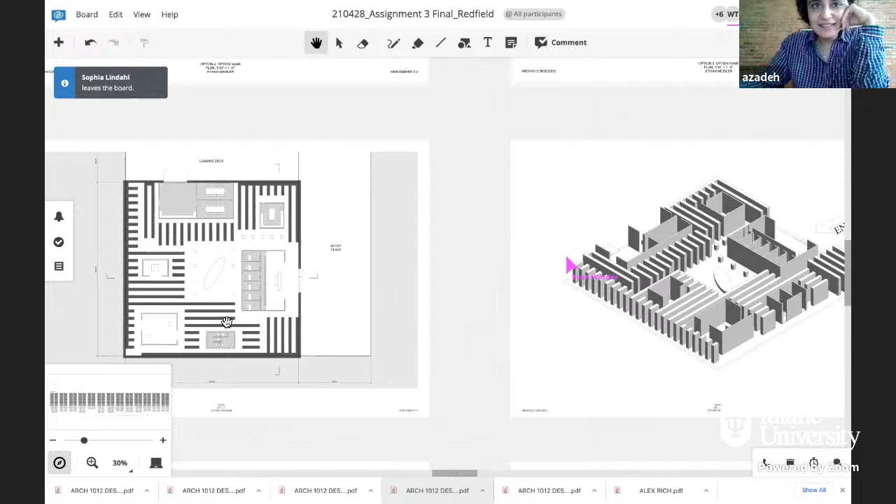This guy really looks like a boating enthusiast. Yeah, we were joking with him that it was starting to look a little bit like a boat show, but don't put ladies in bikinis in your rendering. Is that a 70s thing? Do they even know what I'm talking about? Do they have boat shows and car shows anymore? I'm sure they do. Yep, they do.

Hey, Ethan, just a few questions about the plan. What's this space? That would be a gallery space, kind of a mid-sized gallery space. There's a smaller one, and then the open space in the middle would be the largest, and then the boat space. Cool. And what's this space here? That's kind of a multi-purpose room. It could be a meeting room, research room, storage. There were a number of back of house spaces we had to include. I made it a research room, but all I put there is a table and a counter, so it really can be multi-purpose.

And it looks like in your renderings you show some openings in the roof. Where do those occur? You can see them in the sections. There's three of them. The sections only show two, but they would be right above the two enclosed gallery spaces, and then above the boat. Okay. Oh, I see. You can see all three of them in that one rendering. Right. Edge of one, and then the others.

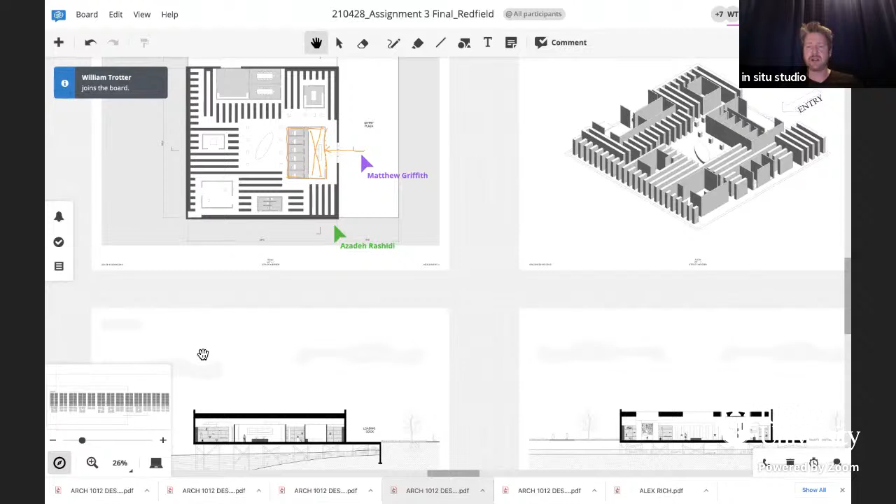Then moving around it and having the main central space be right behind that, I think is also nice, because you have to kind of move around to either side of it, forcing you to be aware of the object nature of that piece at the entry. And in general, the way the program's organized, I think is fairly strong.

You should draw lines above, like dashed lines, to help us understand where openings occur. So, how big is the opening over the boat? Is it that big? Is it more of the shape of the boat? I mean, there's so many options there. So it's a little hard to read those things.

If I look at the spacing and figure ground of the objects, the galleries and the back of house stuff that you've put in, I think they're well arranged in relation to each other, and the central space seems scaled nicely. What doesn't seem as clear to me is the orientation of the shelving and the location of it, and why sometimes it stops here or here. Here we seem to start having a space, but the orientation of the shelves around the space doesn't seem to really reinforce the space-like nature of that little zone.

That stuff seems much more chaotic to me, and I think your precedent project, the SANAA one that you said you ended up favoring, is much more clear about the different, if you want to call them, field conditions. I use the word field because a field is any area of similar quality, basically. It's much more clear about those zones, and I feel like your shelf network is kind of chaotic.

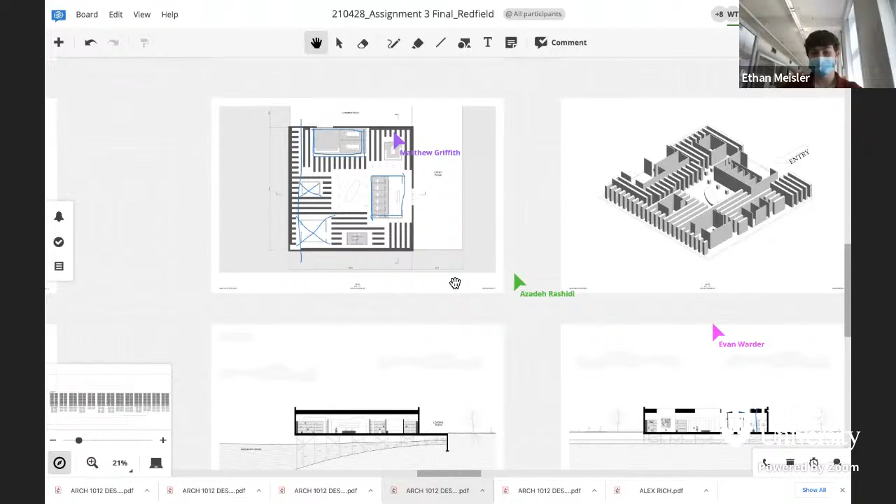Yeah. Well, I can understand how, in trying to essentially replace what I was taught to call the MAZ, or milling around zone, that really dominates the Sanaa project, with shelves. In other words, making the solid void. A decision would have to be made about the orientation of the shelves. Space doesn't have an orientation, but shelves do.

And I think the thinking was, for some schemes like No Stop City and others, there was a clear grain to the precedent running in one direction or the other. But with this, that was definitely not the case. So I definitely understand why you shifted the orientation of the shelves, but I also can understand the comments that make it seem like we don't understand why they're changing orientation when they do exactly.

It almost makes me want to go back and see what would have happened if, since it's such a strong square grid, even though they defy center in terms of space, you just start with blocks of shelves that run in one direction, then the other direction, almost in a herringbone pattern, and then just start carving out from there. So there would always be this point in the history of the diagram where you could harken back to why they are that orientation in this part of the scheme.

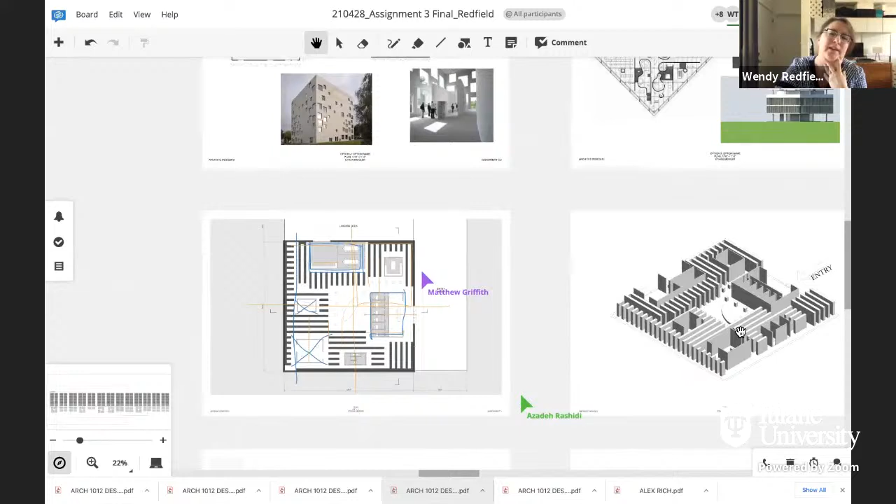To me, this is one that really did internalize, not imitate, your precedent. I think so. In that sense, I think you really did understand the categories of space that it has and translated that into our program pretty well.

Hey, Wendy, this just made me wonder, was the design of the shelf given to students? More or less, yes. I think they even got a Rhino template, didn't they, Evan? Yeah, early on, the spacing was predetermined, 2 foot wide shelves with 3 feet spacing. Because a project like this is very democratic in terms of orientation, like neither X nor Y seems more important, which is very much like all Sanaa's work.

You could imagine just a field of 2 foot by 2 foot glass towers where the objects are on shelves inside those towers. And then neither orientation is more important. But if they were given to you as having to be linear in their orientation, then that precludes that. Yeah, there was a lineal square footage and a surface area square footage requirement, both, right, for the shelving. I guess if it had just been lineal, they could have just made these tall towers of shelving, but area was designated too. Yeah. Then you get to count all 4 sides as lineal. That would be against the rules, but.

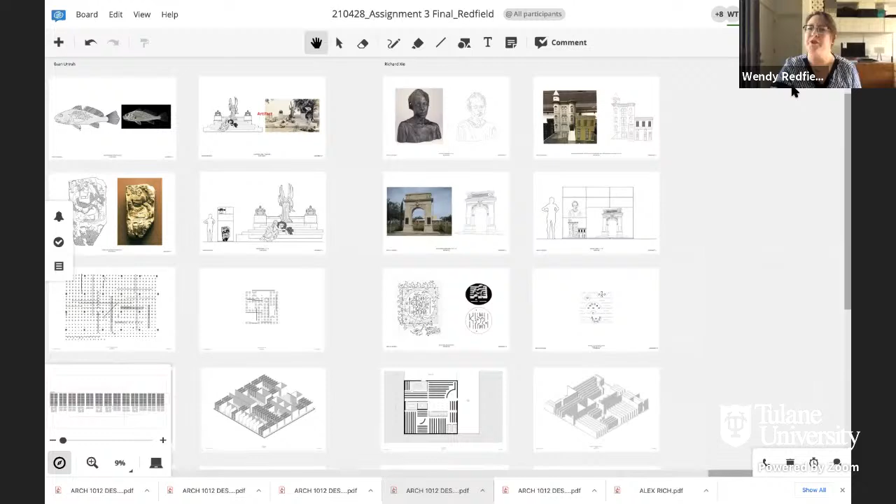Richard, are you with us? Hi, Richard. Yeah, can you hear me? I can hear you just fine. Yeah. Let's make sure all our reviewers are back, but I wanted to make sure you were ready. Oh, okay. I think, let's see. Hey, Oz, I see you're back. Hello. I see Matt's stage, but not Matt. Richard is our one fully remote student beaming in from China at like 3 a.m. So you don't want to have him go first? Yeah, well, I considered it, but it didn't work out that way.

All right. So Richard, why don't you tell us about what you're doing here? You can talk about whatever you want, however you want to introduce this. Oh, yeah. Hi, my name is Richard, and I'll start with the artifacts that I chose from assignment 3.1. So these three artifacts are not super related to each other, but I see them as a chance for me to learn more about the city of New Orleans throughout this course. So yeah, these are the three artifacts that I chose.

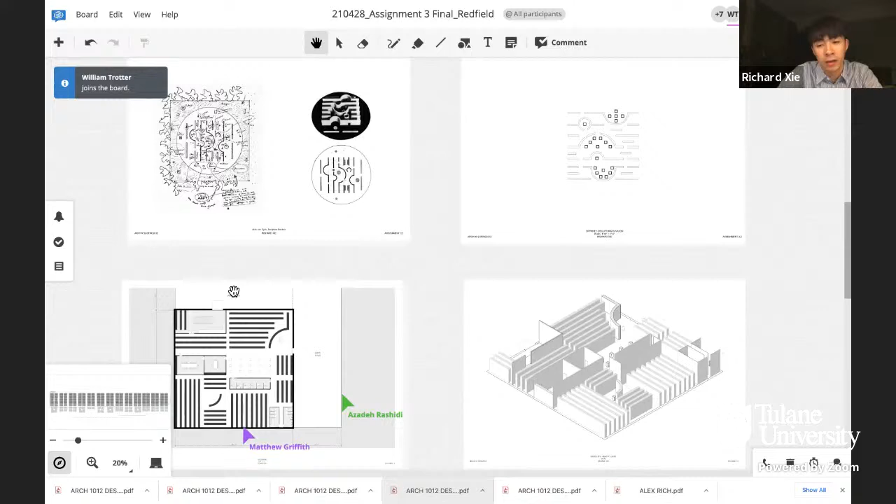So the one on the top right, the curve serves as the front desk. So when the person enters my depot, he or she will see the curve, the front desk, first, and then the other curve serves as a gallery area for maybe one of the important artifacts. Yeah, and I think that's it.

So I'm struck by something in the precedent and your diagrams that I wish had carried through in the project. And that's really how curves play off of each other to create space. It's something that reads very clearly in this diagram. And then your study where, when two curves come together, a space like this is made, or when two curves are back to back, a space is made.

I think as you got into the project, you lost the strength of what these curves can do for you. It's become just small fragments that don't really inform the gathering places you're making within the plan. And I think that's a bit of a shame. It's a missed opportunity. There's nothing that's making this space really special. I wonder why the curve is not the thing that defines this space when it's such a clear organizing principle of both your precedent and the diagrams you've done. Now they're almost like afterthoughts in this plan.

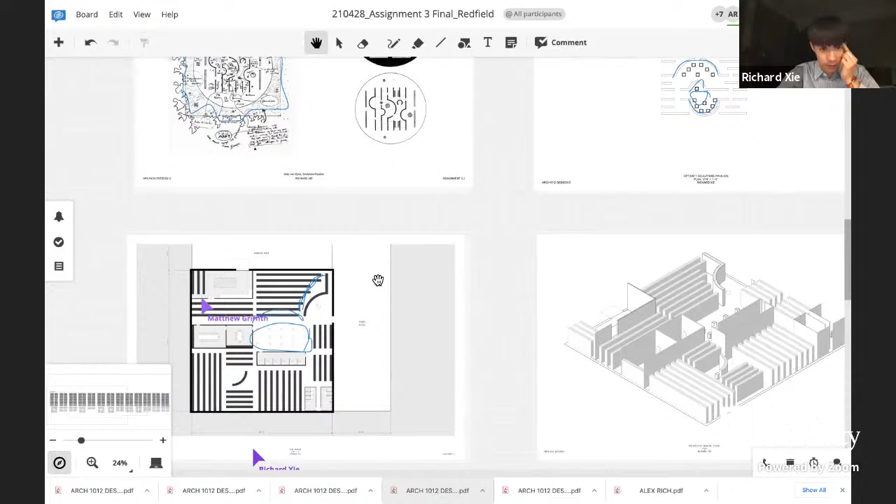Sorry, I was muted. One other thing I notice about the precedent is that the grain or direction of the straight walls is all in the same direction. I really would have picked up on that. I think there would be the potential, if this is the overall form of the project, to have all of the back of house stuff grouped together in one big rectangle along that north edge.

And then all of your shelving is just this super clean move like this. And it's the interruptions in this that start to create spaces, or at the wall, where one of these things happens, it creates the entry. And I know you were given a shelf to work with, but it doesn't seem like a big leap to start curving the shelves. It seems like you've already done it here in your plan, right? Where this reads like a continuous shelf with a curve on the end.

This is one of those rare cases where I would encourage you to more literally study the precedent and look at the way, as Oz already said, the curves are used to make space, because when you say the curves are the most important thing in your project and you're left with just these two little curves that highlight one artifact and the front desk, which itself doesn't curve, it feels like you've definitely lost your way on what you're trying to do.

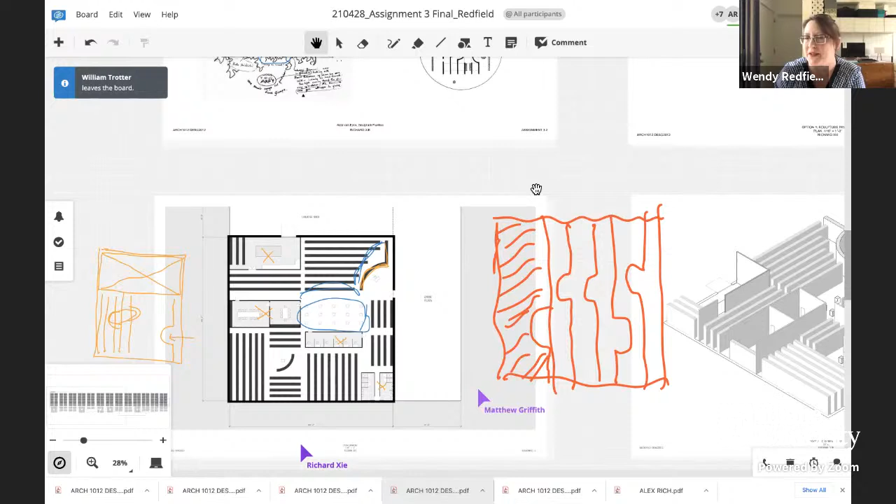Back of house. Yeah, that's right. You move through a kind of almost threshold, sort of solid zone. Yep. Yeah, that could be cool to move through the solid zone into that. I could see it on this side. I could see it where you've drawn it. I mean, lots of options. And you can also make spaces on this wall where two of these things kind of part like this, and you end up making a space that has a view. I mean, there's kind of an infinite number of ways you could use this simple device. Yeah. Once you've made it.

And the other thing that exists in the Aldo van Eyck plan is, I don't know if you noticed, there's even in one place a circle that doesn't quite close on itself. Oh, shoot. I just drew it, but then you moved. I'm sorry. Oh, no, it's good. This little guy right here, right? He's like a little anomaly. So once you make a big space, maybe you start to introduce other little weird things in there that are also shelves, right? So it's not just the line with a little skip stop in it, or whatever you want to call that. Once you've made those spaces, you have ways to create other objects in there.

I just want to point out in the series of translations where that loss of the curve came from, as you can see in that diagram form on the top right, where it was literal. And so we were encouraging adding more shelves, and in doing so, we were saying to keep the curves, but the curves clearly got lost along the way. So it's something that, as you guys are making a great point, can easily be reintroduced. Yeah, neither the precedent nor the diagram has enough density of the storage areas. So when Richard introduced this diagram, we were trying to suggest ways that he could double up or triple up the density, but still follow the diagrammatic clarity that he had, because that was clearly very faithful to the Aldo van Eyck precedent.

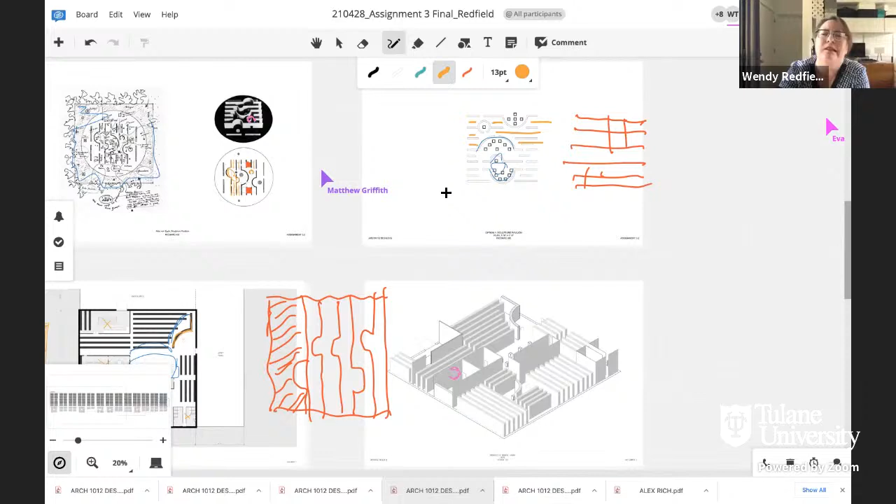I think the main thing that is so clear to all of us, Richard, and probably by now to you too, is that with this precedent, you can change the number of curves, you can put them in different places, you can make them bigger or smaller, but the one thing that just can't go away is the element of your diagramming of it that has a one-dimensional grain. There's no cross grain with this thing other than with the shelving, or the curving of the wall, but that's not even, you don't have any linear elements running this way.

And so that's where there's a really big disconnect in a way from this diagram to this plan. And I think, with more time, we could have gotten that back under control. I know Richard lost a chunk of time in the critical last couple of weeks, and he did incredible work to kind of catch up and complete the project. There was a lot of back and forth and massaging and development of the diagram to the plan that just kind of didn't happen as a result. So

I think with that said, it's really creditable to you, Richard, how much work you've done in such a short amount of time. I mean, 3 weeks isn't enough for anybody anyway, and you really only had a week and a half. So it's amazing to me what you were able to pull off in that shortened amount of time.

Yeah. And Wendy, one thing I'm realizing that's really a lot better about what you drew than what I drew is when the grain of walls is parallel to the service zone, you can start carving those half circles out of the service chunk. That's really nice. Yeah, you might even do it on the other side, so there's like a private little lounge or whatever that faces the water for the employees. It's not open to the public.

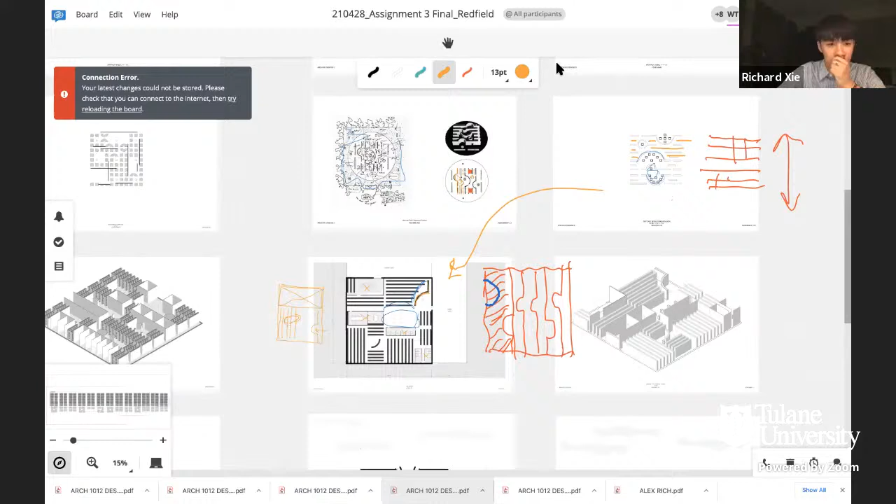Do you understand what the criticism is about, Richard? Do you have any? Yeah, definitely. I think it's my responsibility to really think about how to arrange these curves. Even with the requirement of number of shelving, there are still ways to interpret these curves. So yeah, I really take responsibility for that. Okay. All right. Well, great work still. Really some beautiful graphics, beautiful drawings. Good work. You made it.

All right. So I'm actually going to refresh my concept board because it doesn't seem to be there. But Evan, are you ready as soon as we get this back? I am. We all laid awake last night, well, I did, and prayed that concept board wouldn't crash on us. It's been kind of a little finicky lately. But so far, so good. Should I start? Yes, please.

So, hi, I'm Evan. My design for my archive was influenced by an illustration from Archizoom's No-Stop City. The main takeaways from the No Stop City precedent were the underlying grid system and then the interruptions in that grid that were produced with repeated geometries that were also put in elongated forms. When developing my drawings, I kept these elements in mind. I used shelving as my underlying grid system. The back of house spaces and front of house spaces were implemented in such a way that they conform to the grid system, but could still be recognized as interruptions.

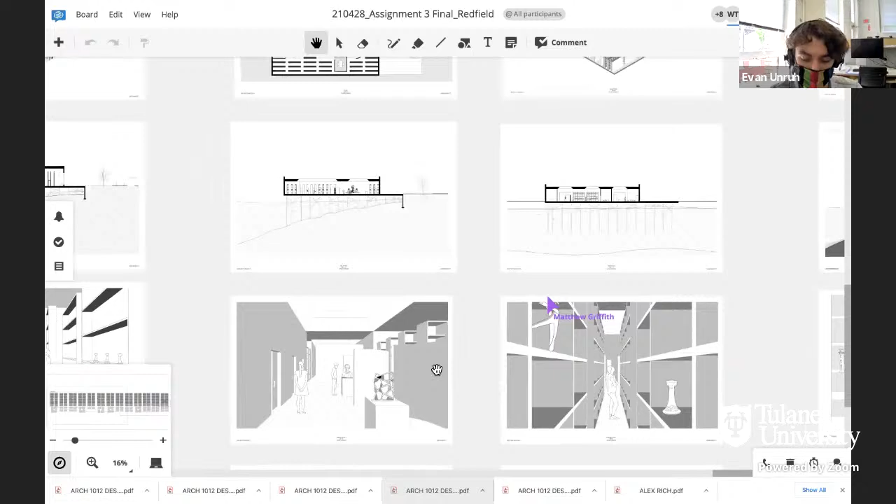Sorry. Moving archive goers through the space was done subtly. The only form of natural light comes in the form of sunroofs, which are only above the 6 exhibit spaces. This highlights and entices exploration through the space because of the light, and the spread out placement of back and front of house spaces entices viewers to look around corners and go through the archive as they see fit, since the shelving and exhibit spaces are otherwise obstructed.

What are the curved elements doing? They are 8-foot high walls that would have the artifacts, taller artifacts hidden inside the curve, and just promote movement throughout the space. So they're kind of protective enclosures for the artifact? Right, exactly. Rooms within rooms.

I think the one thing when I look at your renderings that really stands out about them is, one thing you should always look for in your work is in plan, those curved walls appear to be the most significant things because they're formed differently than everything else, and they are in the middle of or on the edges of the openings in your plan or the larger spaces in your plan. So they seem really important.

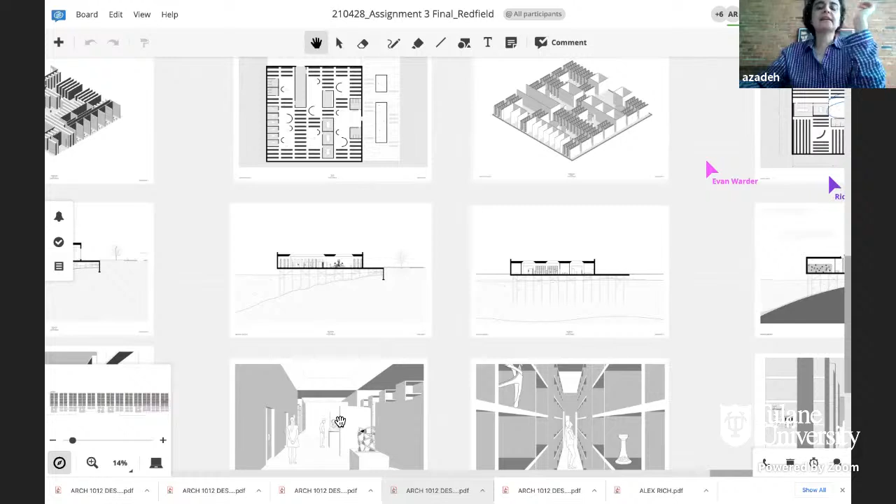Yeah, I think about it in these terms. If I were to take them out of this plan, would I miss them? And I wouldn't, because the spaces you're creating are not about these curves. They're kind of diminutive gestures. I think the plan organization is great, and the sequence of solids and voids and so forth is very rigorous but well thought out. And I love that you've attempted a landscape design outside of the building that extends this idea out. But yeah, the curves just seem superfluous right now. You should certainly push it one way or another.

This is one I definitely have to take responsibility for. He had more curvilinear elements earlier on, as you can see in the diagrams, and he was very close to completion. When was it that we spoke? Was it last Friday, Evan? It must have been, yeah. Something like that. And so the curves had gone away, and everything was obviously incredibly well worked out and organized and rigorous. And I sort of said, oh, are you missing those curves? Do you need a little something?

And for better or worse, he listened to me and inserted them back in. But I agree, and it's probably my fault that they're not fully realized as much as the rest of the project is, because chronologically they came back probably too late for them to be fully engaging the rest of what's going on. But I'll take the rap for that.

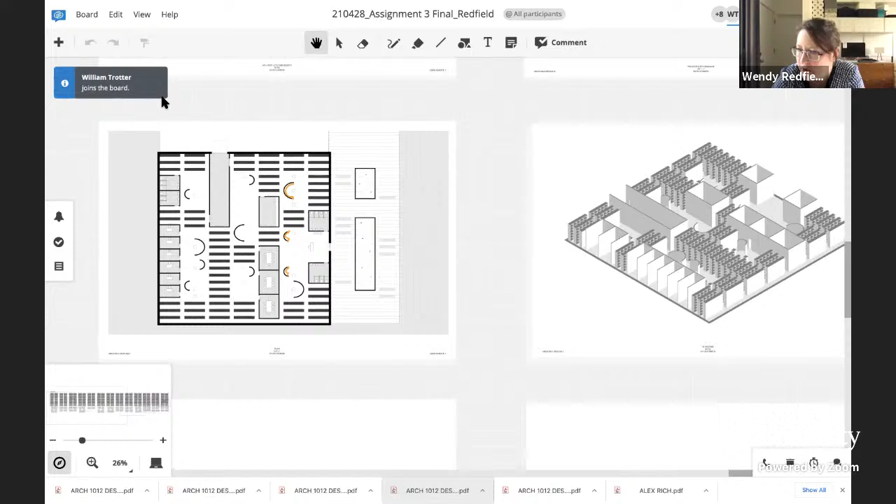I was going to try to go find the image, but I won't interrupt our flow. I'm sure you all know it, the Ronchamp side chapels, Corb's Ronchamp, that were curved, and they reach up and have these light monitors that break up through the ceiling of the space. That would be a great thing to look at, Evan.

I agree. No, I completely agree. Yeah, they could have either been removed or played with a little more had I had time. I think they're sort of in a state of becoming. I don't regret that you tried it, but I do agree that it's almost like they're coming into a play that's the third act of a 4-act play, and everything else is so developed and so clear and refined and resolved that they're coming off as kind of afterthoughts, and that's what they are.

But I still think it's great that you gave it a try, and I think with another week you could bring them in and you would have a much richer project as a result of reincorporating that aspect of your original diagram. So I don't regret that they're there, but I wish you had thought about bringing them back a little bit sooner.

I think you should take it a step further now and really try to be strategic about where they land and their thickness and relationship, because you're nearly there. And I'm glad they've come back, but they've come back kind of haphazardly. But with a little more time, you can really get it there.

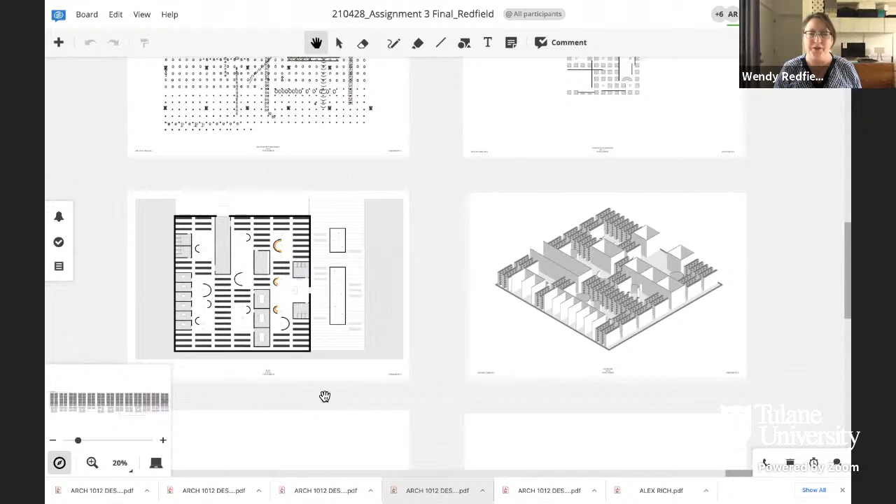Thank you. All right. Next project is Lauren. Are you with us, Lauren? Yes, ma'am. Hi, I'm Lauren. Or I'll wait for you to pull up my work.

Okay, I'm Lauren, and the precedent plan I used was the Diamond Museum C, designed by John Hejduk, because I was intrigued by the way the curved walls cut across the entire plan, giving the middle more purpose. And so I used that idea for my main gallery, but I gave it more room around the sides of the walls to make the main gallery have more space and let the large artifacts it held have more space, just to accentuate that space.

And then I straightened out the walls more to make it easier for artifacts to be hung on the walls or against the walls. And then I added four 6-foot by 6-foot skylights above the main gallery to accentuate the main space with all the objects with more natural light. And then at the corner diagonal of the entrance, I added a really large window and a large skylight above it to have that light at the end of the tunnel feeling when you walk in, to make the entrance more exciting for the main gallery.

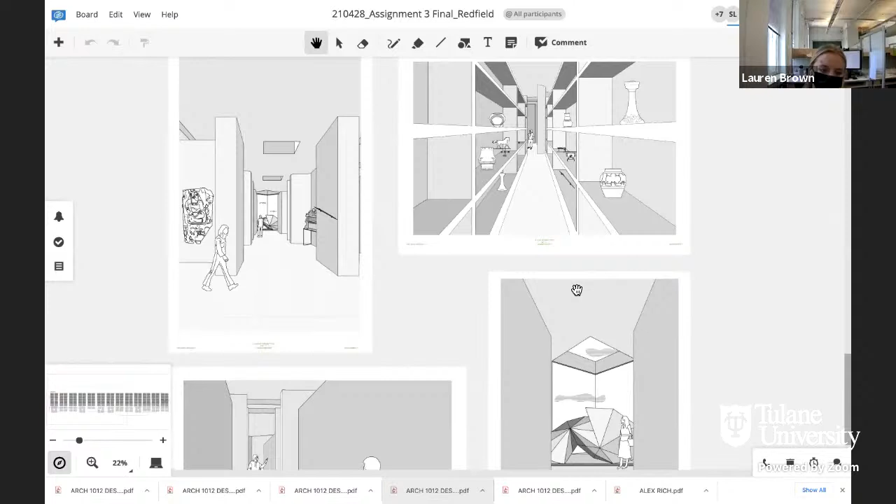So this is the primary gallery. This is the secondary gallery. This is the end of the primary gallery, right? Where you have that special window highlight, and then a sort of typical space in the shelves, facing back toward the main gallery.

Well, I think the northeast to southwest axis, so this guy through here, is a really great idea. And the things that I think it does really well are it brings you, because you have a destination that I think would actually be really beautiful. It kind of gives you a move through the plan that's going to draw people all the way through.

You've taken a leap that not everybody's done today, which is you've started to manipulate the shelf you were given to kind of create these special shelves that not only create little gallery spaces along the way, but also create an edge for a larger gallery, and everything else kind of hides behind it. And I think that is really, really very smart.

And it'll be successful to the extent that these spaces are good and this is very special at the end. And I think you could definitely work on both of those things and make them better with time. But the kind of organization necessary to have that potential is there.

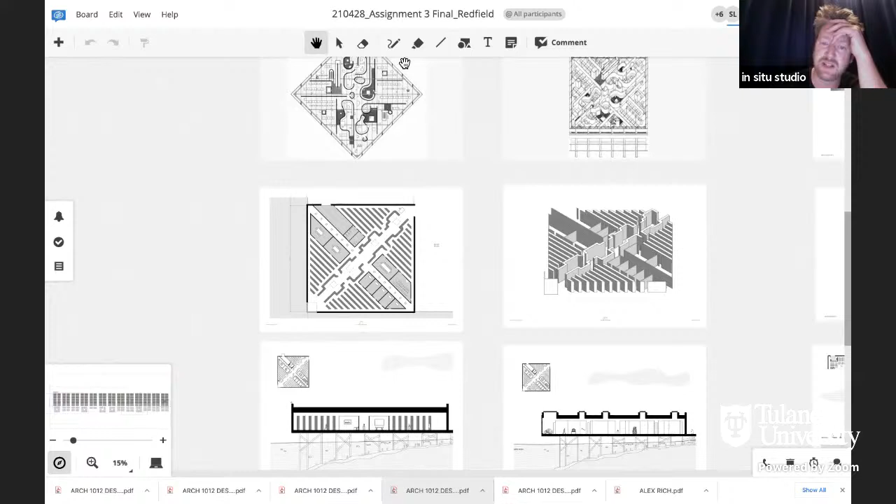And the reason for that is I do think that this cross axis has problems. It means that the center of the building is kind of setting up to be the most important thing, which you haven't made it that way. This actually, I don't think would be a great center. And it means that hierarchically, this kind of northwest to southeast axis competes with the main one that you've made, especially since it has little artifacts in it as well.

And I don't think it's necessary for the project to have kind of a cross axis, especially when there's only one real entry and one real kind of culminating moment that you've made. That would also allow all of the shelving between the service stuff and the special shelves to just be this monotonous kind of linear crop row sort of experience, like a true archive. And I think it would be a much clearer diagram.

But to me, it's a really interesting project. I was hoping that somebody with the John Hejduk precedent, by the way, it's pronounced Hayduck, would choose the diagonal just to kind of see what happened. And you did it, and it turns out it actually yields some pretty interesting results.

Yeah, I really like the organization, the clarity, and the kind of special experiences that you've created within it. I actually don't mind the other axis, but I want to understand how it's different experientially. Like if the main axis is about all these spots of natural light, and the kinds of objects that you would display in natural light, maybe the other axis is about darkness and the sort of things you display in dark lighting conditions. And I think there's an opportunity to use the back walls of your back of house spaces, because you've very intentionally created blank walls that face the gallery axis.

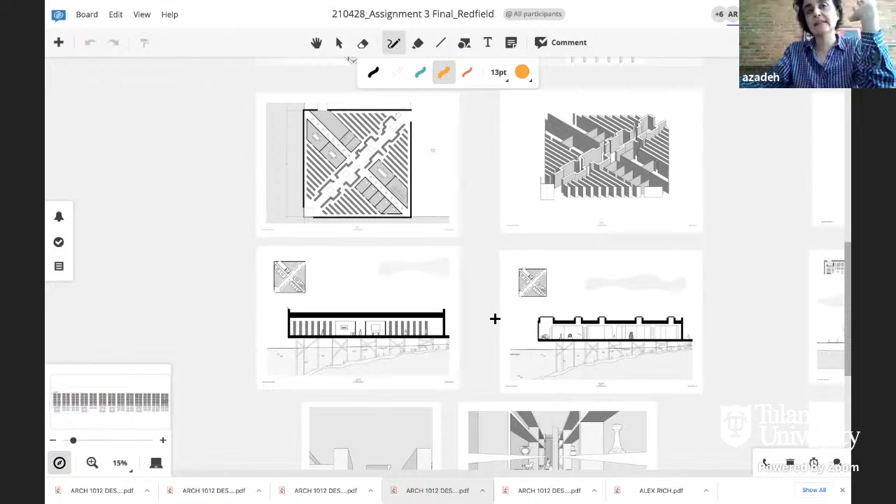And in the same way, I think when you get to the end of that alternate axis, you should think about the space you create and what the destination is, because that one seems to terminate just into a corner. It could be just as special an experience to sort of reach that end. So that's something that could be pushed further. But overall, I think it's really great as an organizational strategy, and there's a lot of different experiences set up within it. It's efficient. I think it's a really nice project.

Thank you. I also definitely agree about the other corner, because since there is a space there, that could have been cool just to incorporate something else as well. But for next time, you don't want to compete with the other one. I completely agree with the comments, but it could have been as simple as just peeling back the back of house space on alternate corners. You get a sort of orthogonal symmetry. It could have been just something as simple as that.

So that, or maybe a little bit more, so you have sort of mini galleries at the ends. It's a tough balance, because you don't want to compete with the primary gallery and axis. But yes, I agree. You just kind of hit that corner and get repelled like a ping pong ball. You could also pull the special shelves, wrap them down the sides of that alternate axis. I don't think my board, by the way, is working because it's not storing what I'm drawing. So what I said earlier probably made no sense. But if these started to pull down the wall of the secondary axis, that could be interesting.

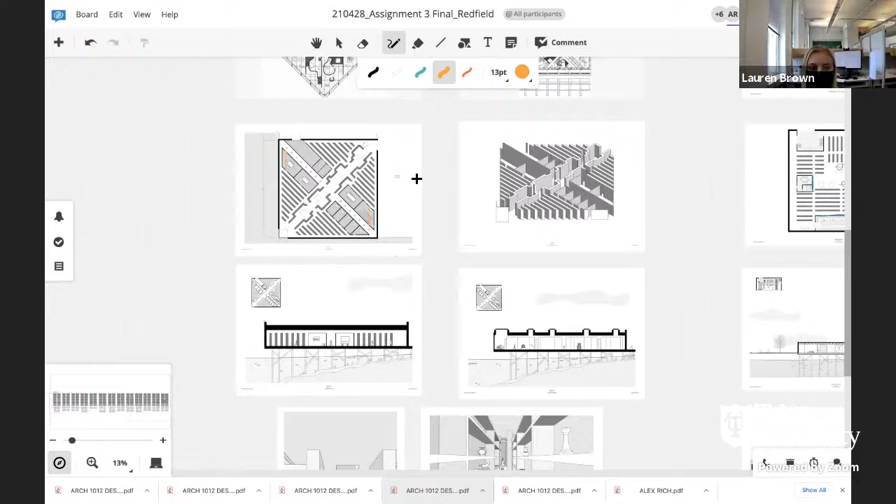I like the idea of it being a totally different experience, where the main axis is very light filled and contoured, and the secondary axis is thinner and more kind of linear and dark, with pronounced moments of task lighting almost. I completely agree. I love the way that both Oz and Matt have described that contrast. And I think your two perspectives here, the top left and the lower left, do show that kind of difference of space, but it could be pushed even further.

In other words, it almost makes me wish that the darker one, the one on the bottom, is even narrower and darker, and maybe the pedestals become blocks attached to the wall, because there's not room to circulate around them, because you make it narrower and darker. And then I think that the particular width of this one is not going to seem as almost equivalent in terms of the gallery experience as the one below. So just heightening the contrast between the two a bit. I think it's easy to imagine a really light-filled gallery. It's something we see all the time.

But one precedent of a very dark gallery space is the Zinc Mining Museum by Zumthor. You should look at the interiors of that project. It's astonishing how dark it is. But then there are much smaller objects displayed in there that are lit artificially, and they look like jewels. They're really beautiful.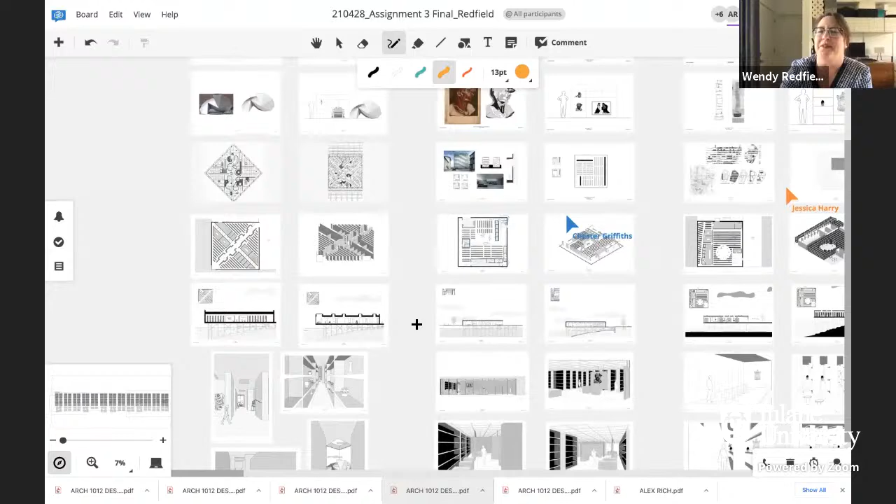Yeah. All right. Very nice, Lauren. Good project. Thank you. Not an easy beast to wrestle to the ground. Very brave to go with the Diamond Museum. I think you pulled it off for sure.

All right, Joaquin. Yeah, I'm here. You are up. I'm just gonna get over here.

All right. So hi, my name is Joaquin, and for the precedent, I chose Parc de la Villette. The first thing that caught my eye on the precedent was the shape of it and how you can see that it's two-parted. There's an upper part and a lower part, and there's a line or a segment that is broken in the middle, and that's what I was interested in.

So what I tried to incorporate in my design was the shape of it, and that's where I used the pathways, where I tried to create the shape of the building in my plan, as well as I wanted to emphasize movement throughout the gallery spaces, where you can move freely wherever you want. So yeah, that's basically it.

Short and sweet. Yeah. Hey, do you mind zooming in a little bit on the plan? My concept board is having issues. Thank you. You are welcome.

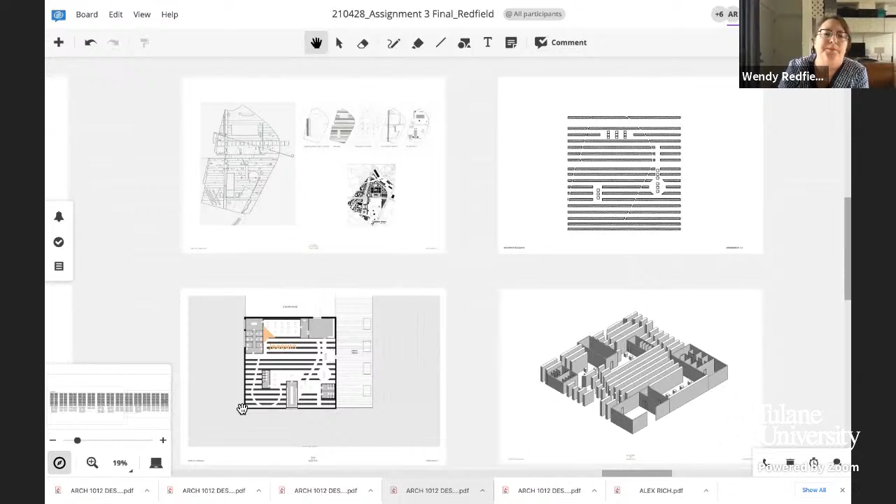I think he's talking about this, the curve from the limit of the site, and then he kind of took some liberties. Yeah. That is what I meant. I meant the kind of curving path that carves through the shelves. Yeah. So you can cut corners. At first I had the shelves all the way from one end to the other, but that didn't help, because you can go through the shelves, or you can cut any corners and go to another shelf if you want.

Yeah, I mean, for me this is similar to what we talked about on the previous project, and you actually did it here. You introduced this circulation route that is, from a geometric or formal standpoint, very different than everything else in the plan. And the question becomes, when do you see the path? When do you cross the path? When do you encounter the path? And once you're on it, where does it take you?

So if I just try to trace the experience of entering the space, there's the desk there, and I guess I would move down that wider aisle behind the desk, and then I encounter this path that slices through the shelves. I think the fact that you've done it is smart. I think where it leads and what it does needs quite a bit more study. I can see that if I walk behind the desk and move to the left, I end up in one of the smaller galleries, which is cool. That seems like a win.

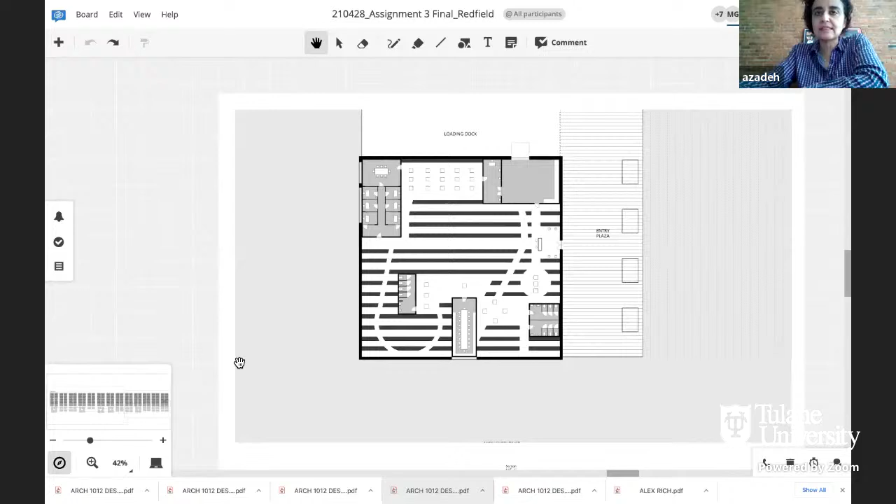And I'm so curious to see views that are all about being in these secondary zones. I don't know if any of your views are taken kind of along the curved path, but it might be interesting to see what you're seeing with these kind of diagonal slices of the shelving. And then tightening things like this up where that diagonal isn't yielding anything by the time you get here, right? The point is to get to this space, and that's where it should terminate. So a couple of little tweaks can really strengthen your intentions here in terms of that secondary path.

I think those are really great comments, Joaquin. Yeah, thank you. And I think that the decision that you made relatively recently to sort of take that imprint of the site extent that was really site driven in Paris and start to realize, well, I don't need to be a slave to that because that's about that site, not this one. And so then you start to take liberties. I think you were definitely on the right track. I hope you're hearing that.

But it's a little bit like Evan's curved apsidal gallery walls. It's almost like it came a little too late to really leave that completely and incorporate your new kind of alternate path around from one gallery to the next. But I really think that you got some great commentary about that. And I don't know if this will make sense, but the real advantage to this strategy to me is that I would start with a completely uniform hatch or crop rows of shelves in this space. I would carve the galleries out.

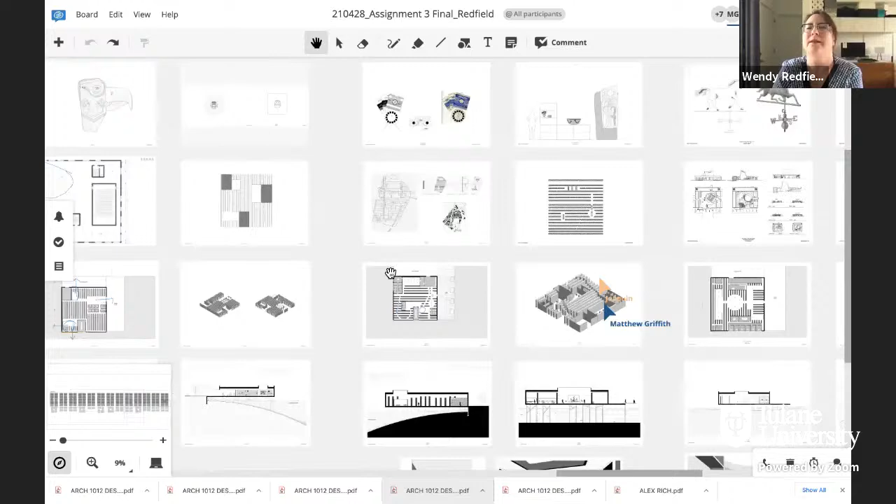I'm Helen, and so at the beginning of my project with the artifacts, I was originally inspired by old New Orleans. So I have a piece of Newcomb pottery, a Tiffany clock that was originally in the Howard Tilton Memorial Library, and a horse weathervane. And then moving on to the precedent for my actual exhibition, I was inspired by the Palace of Assembly by Le Corbusier. And so at first, I had been attempting to actually use the circular space that really is the emphasis of this building by filling it with shelves instead of using it as a negative space.

But towards the end of my project, I realized that a negative space was a lot more useful for this purpose. And I really liked how Corbusier emphasized this circular space in the center and kind of left all the other important regions to the perimeter of the project. So I wanted to do that without just placing my back of house spaces along the perimeter. And in terms of how people would move through my exhibit, I wanted to not have such a grand entrance, but kind of have reveals throughout.

So you walk through these shelves upon entry, and then you kind of find yourself eventually within the circular negative space. And then even after that, there's the rectangular gallery space that is an additional reveal that wouldn't have any shelves in it, but that would just have more important featured pedestals. And in terms of my back of house spaces, I actually did incorporate windows in each of the office spaces so that in the office you have a view of the Mississippi River.

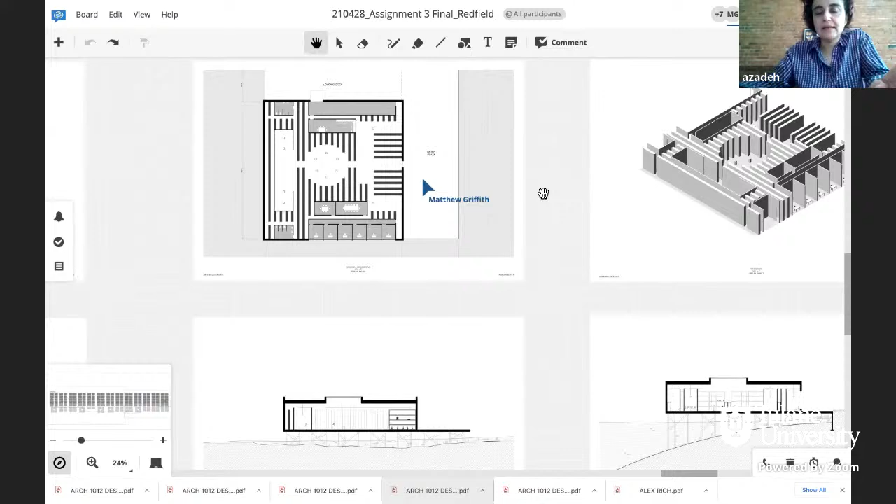Yeah, the way it is, there's an all roads lead to the cylinder aspect. And on one level, I guess you could argue that makes it more hierarchically significant as a center, because it's an orientation room that then sends you back out to different quarters. But I definitely hear what you're saying, Az. I guess the question in my mind is, should either of them have a wall around them or not? Right. Either one. Yeah, what are shelves doing for you as a structure versus walls? It's not really clear why walls are ever needed then, except for back of house spaces.

Yeah, exactly. So these could be, I guess you would lose some square footage to the room, but if these were shelves and it was open on either end and these were shelves that just got stopped, it would whittle down the width of your gallery a bit, but probably not too much. Or you expand it by going to the next row. Go to the next row, yeah. But then you have this thing where it's the circle competing with or the rectangle competing too much. Yeah.

Well, to me, the question's not necessarily about which one's better, because you'd have to really study it to know. It just, to me, indicates a lack of certainty about how you make space in the project, right? You could also see walls here to create a space, very much like this is handled, or vice versa, not doing walls either place.

You said that all roads lead to the circle. It feels to me like the only road leads to the rectangle. The plan organization to me is challenging because it creates a dead end, especially when this is surrounded with walls like this. And it puts an incredible load on this moment and this space to be an incredibly good space. But it also requires visitors to turn around to keep using the rest of the interior.

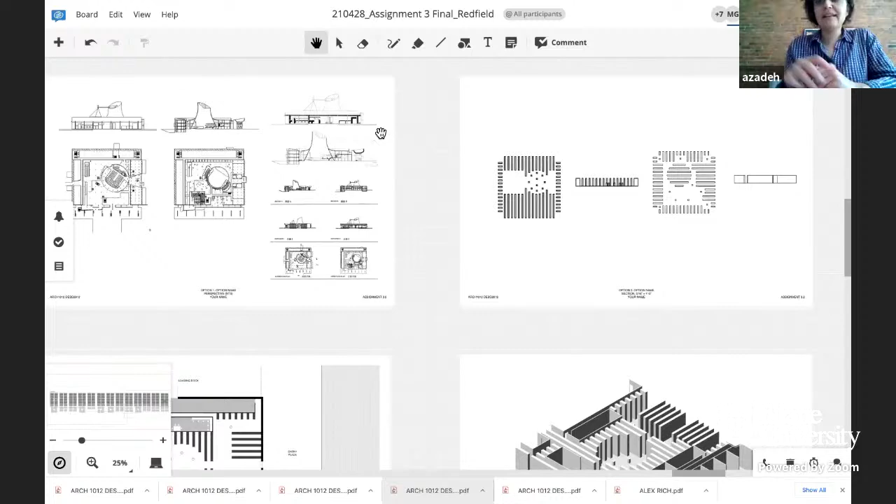Looking at it now, I hear everything that all are saying, and clearly the circle is off center relative to the vertical axis, but it's very close to being on center in the horizontal axis. So it feels like it maybe wants to be pushed up a bit, but also the difference versus equivalency of these two, the two other galleries, they're clearly different in proportion.

I'm wondering if this one wants to kind of just push to the edge and have more thresholds of shelves in between the two, because it almost feels like there's a little bit of putting all your fireworks off at the same moment instead of having sort of two big moments because they're so close.

Yeah, I might keep all the shelves moving the same direction, that north-south direction, all the way to the front wall too. So you create a really dense threshold that you have to pass through upon entry, to make that moment of passing into the circle even more significant.

I don't disagree with that. I know you were pulling off of the change of orientation of the one side of the Palace of the Assembly, but when they have the same dimension and density as the other shelves, that reason kind of goes away, and you probably could get a lot more shelves in if they all just stayed in the vertical.

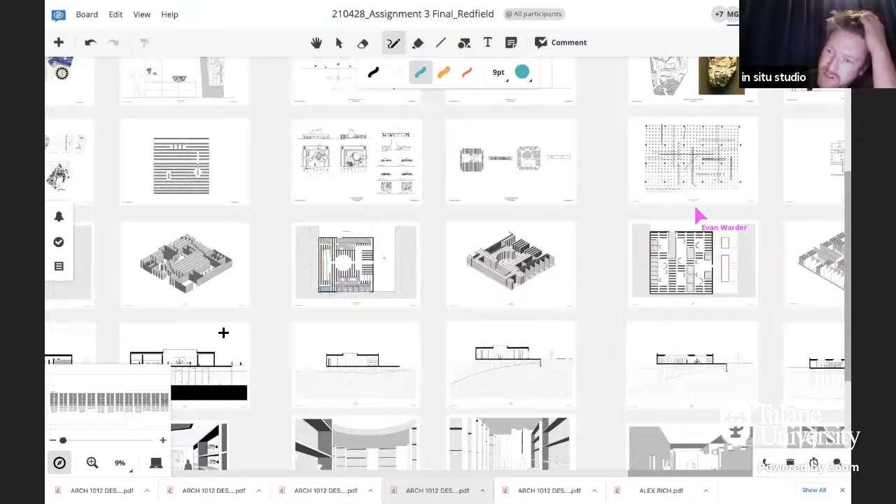Yeah, I think as a general rule, the thing with the near symmetry is, we actually have a rule in our office: no near misses. You either gotta look like you meant to, or make it dead on. Those are the two options. And it's an important one when you're working on real buildings, talking with contractors. Just sharing that rule early on.

They get it. It's like, hey, we're going to miss some things out here. If we're going to miss, we're going to look like we meant to. Otherwise, you've got to make it perfect. You've put that nearly symmetric axis just barely off center. And maybe it's a personal issue, but it drives me crazy. Oh, no, I think we all agree with you. Yeah.

All right. Did you have any other questions? I don't think so. I completely understand everything you guys say, and I agree. Now that I'm noticing that, it is driving me crazy too. But thank you so much. Absolutely. And as with everyone else, the critics are pointing out things that could happen later, that don't always need to be fixed right now. All right, thank you, Helen.

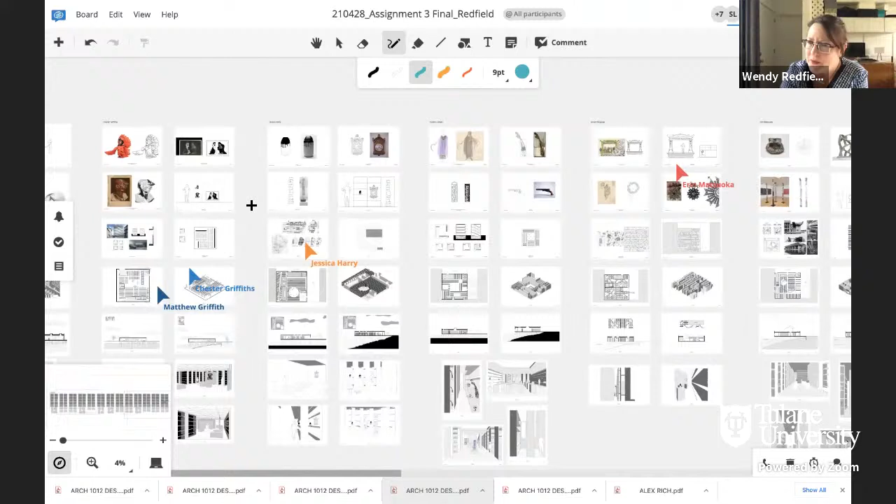We move to our final project. Gosh, we've done great with time. I haven't had to interrupt at all. You guys are finishing right on time. Amazing what another hour will do. We've been squeezed into somewhat under 3 hours of class time. 8:45 to 11:40 has been our time frame, and it's hard to get through 13 projects. Wow, yeah. It's really hard. Okay, Sophia, take us home.

Okay, so my precedent was the Kunsthaus by Zumthor as well. It's been interesting to see how Chester and I interpreted it differently in the directions our projects went in. I chose this initially because I really like the clarity of the design as a diagram and the solid spaces on the side versus the really big void in the center. Moving from the Kunsthaus to my diagrams, that main void shrinks down and then spawns these smaller galleries that go more around the edges.

More specifically, those smaller galleries and the items they display, I wanted to really highlight those. So I have skylights, as you can see in my sections, that shine light directly onto the individual pedestals. And then a larger skylight in that main central area that lights the whole space at once.

I added in some windows. I also broke the rule on the Mississippi River sides to frame the view, and then designed a plaza on the outside that sticks with the system of shelving and extends it into that plaza with little blocks of planters and trees.

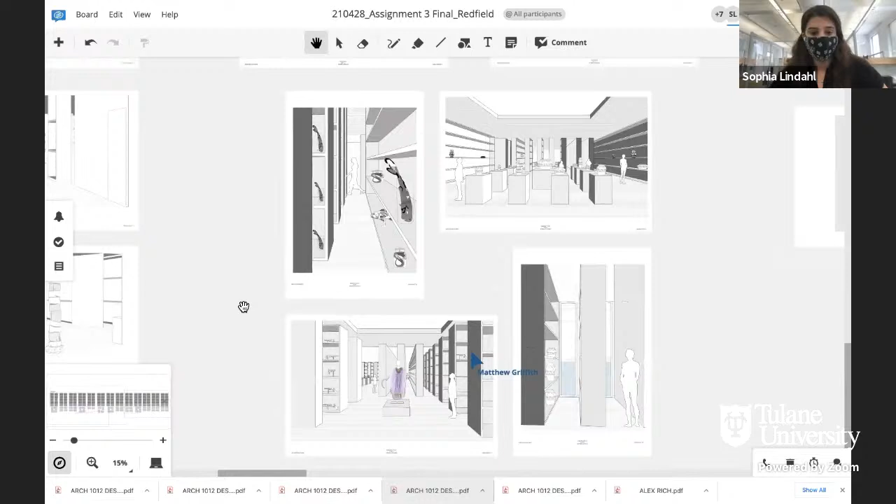So one thing I see here that I think would really help movement through this space, and it's in a sense of fidelity to the precedent, is this condition at the ends where the shelves meet walls. I really like the focus on how you terminate a corridor with a window, for example, or this view that you have with glazing at the end of these shelving zones. So being able to look out, that's really nice.

But I think, as a user, you would be incredibly frustrated to get to the end of this row and have to retrace your steps. And the Zumthor project is all about circulation in this outer band. So I think there's an opportunity to always create almost usable mini gallery spaces at these ends.

Maybe you don't want it here because that's kind of your back wall, but being able to hold off from these walls and allow for greater fluid movement through the plan, but then emphasizing what you culminate at the ends of these bands. So rather than maybe doing this at the end of every aisle, it's really what you get to experience moving in that outer band that you focus on as the special highlight.

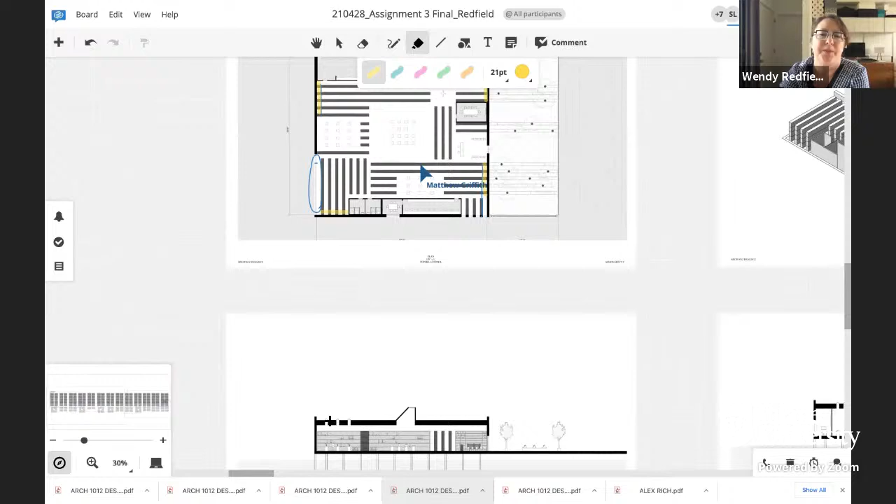Actually, those ceilings could pop up and be where skylights are located. That would be another way to handle it. Not to the exclusion of the big center one on the interior space, but these could move to the edge. Does that get at what you're talking about a little bit? Yeah.

I think that, if I look at the translation from the Kunsthaus to your diagram, the primary thing I see that shows up is your reading of the pinwheel. I know there's only 3 bars in the Kunsthaus pinwheel, but the way those 3 walls work, since they start shy of a corner and go all the way to a corner in all 3 cases, starts to suggest a pinwheel. And I think you've consistently done it, but if I zoom in on that diagram, if I'm really thinking pinwheel, if this one's doing this, this one down here has to do this, and this one here would do this, and this one, which doesn't exist in the Kunsthaus, would be doing that, right?

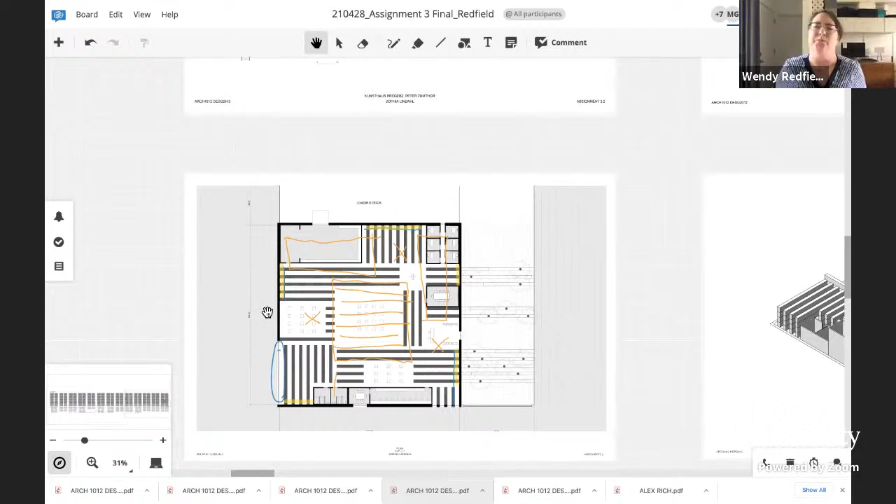Yeah, I think I abandoned it for some reason that I can't remember a long time ago. So it definitely would be interesting to revisit now and see if I can make it work. Sure. Yeah, I think it doesn't have to just be in the middle, because it probably still doesn't get enough shelf space. I don't even know if y'all can see, my concept board is giving me another warning, but if the shelves that I drew went all the way to this back wall, you're really talking about an object that big, where you get gallery here, entry here, right? So it feels like there might be a way to make it happen. But.

I don't disagree with a lot of what's been said, but here's the thing: when you're working from a precedent and you're asked to diagram it and then incorporate your program and transform it, if you're too close to the precedent, people are going to say you're too close to the precedent. You're going to make it your own. And then if it's not dead on, or there are places where you're removing yourself from the strict organization of the precedent, then you're going to hear about that. So it's kind of a no-win situation.

But I think what I always admired about your scheme, Sophia, and as much as I love this project, the Zumthor Kunsthaus, and the diagram that it represents, is that the way that you introduced your own spin on it, like the square gallery here, that's not coming from Zumthor at all, but it just seems really well handled to me. With a couple of exceptions, I think maybe both Oz and Matt talked about that here, like the back of house space is coming to the wall, and then this one kind of doesn't, and maybe it should slide down and take that corner, I'm not sure.

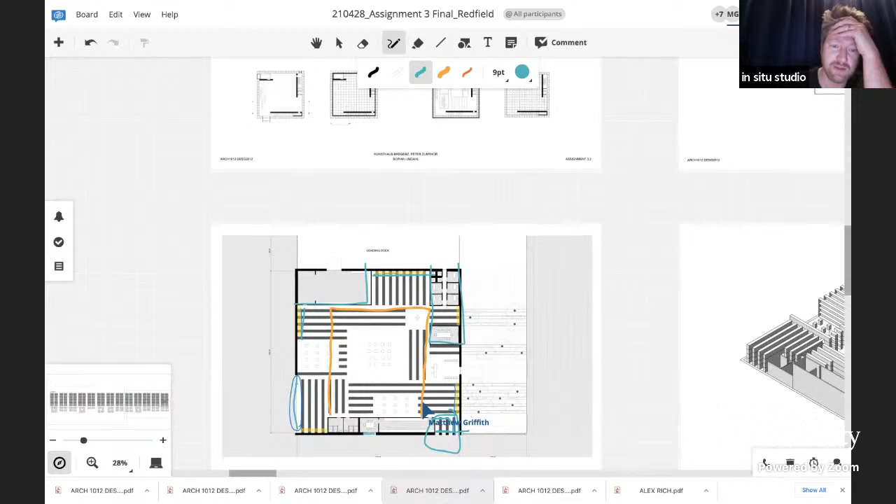What do you mean? I mean, I'm not displacing any shelves except these, and they would be regained over here. Oh, I don't know if you can see what I drew, but the big orange square in the middle that is left over, if that was all shelves, it seems like it would be enough shelves. You're probably right. And then you'd also have enough back of house and gallery space too. Yeah. But then it would start to look like Exeter.

No, I know. I mean, you could generate an almost unlimited number of great building plans from even just this precedent, let alone the others. So, but it's definitely worth thinking about. I thought we had some good conversations during a very tight period of time about figure-ground reversals, because so many of the precedents, some of which I chose, some of which were studio-wide, are reliant on a surface of open space in which solids are placed in one way or another.

And you just have to divorce yourself from the relationship or the proportion of solid to void; you have to reverse it to make it work for this program. Which is, if you think about it, kind of a sophisticated idea for a freshman studio. Yeah, it's great. It's a great project and problem. And great precedents. I think they're all solid. You can get a lot out of them.